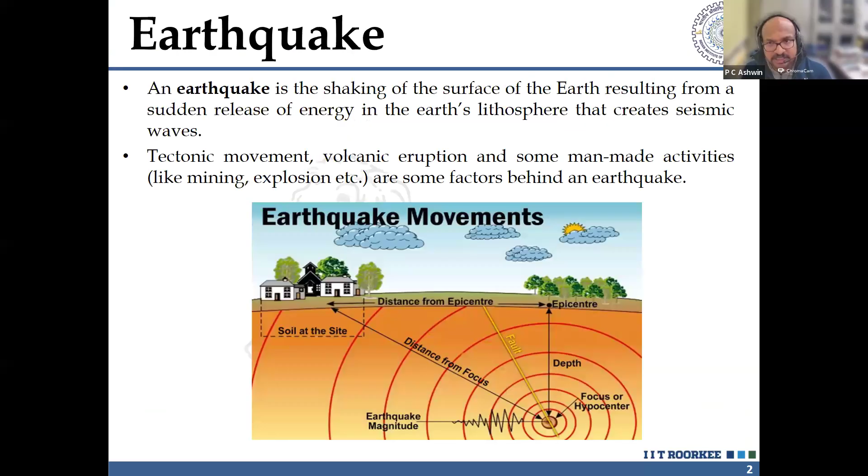So before the structure, this particular thing is related to earthquake. We understand that the earthquake can happen due to tectonic motion, volcanic eruption, or man-made activities. That is how an earthquake can occur.

Now, when an earthquake occurs, you have to understand that it is due to ground motion vibration, and it can impart on the structure acceleration, velocity, and displacement etc. Due to different intensities or magnitudes of earthquake, the damage that is there in the building can be varying.

Now, when you ask me about earthquakes, civil students or civil faculty might be able to understand that yes, during an earthquake, we expect damage to happen in the structure because we are taking care of the forces through the use of response reduction factor.

What we do is, if an earthquake is going to come and there is a demand, let's say 1000 kilonewton demand, think of it as a force. We actually divide that force by a certain number, based on the ductility of the system. The more ductile the system, the higher value of response reduction factor we use.

So we expect that when the earthquake happens, the entire structure is not going to be elastic. It is going to deform, going into the inelastic range. And because of that inelasticity, there is bound to be some cracks that happen, let's say hinges in the columns, cracks in the walls, etc.

The main intention of earthquake design, the philosophy with which IS 1893 and the different codes are made, is that if there is a severe earthquake, the structure will not collapse and your life is safe. So that is the case that we expect damage to happen in the buildings, right?

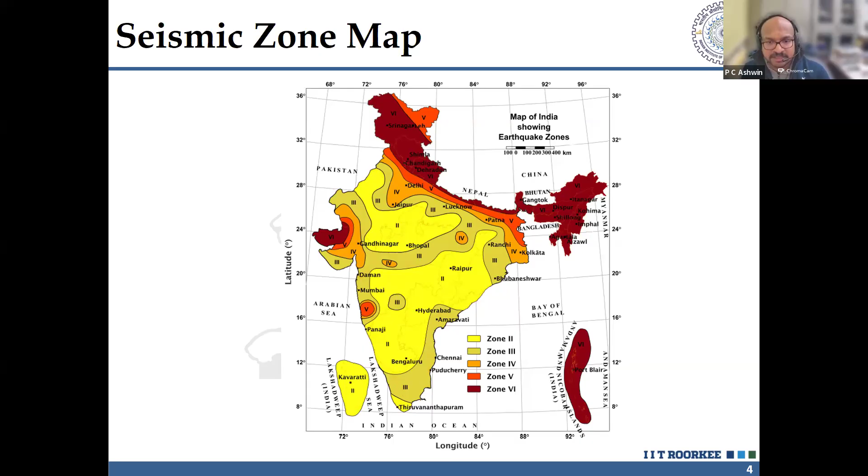These are the highest seismic zones in India, and you can see one more thing, that there is no place immune to earthquake in India. Somewhere or the other, an earthquake can happen in these regions. So this is the latest seismic zoning map, based upon the probabilistic seismic hazard analysis. There's nothing better than this in terms of understanding the seismic zoning.

Now, if you want to understand how the building responds in terms of an earthquake, simply like how a teacher would explain: earthquake is something like forces in the ground, the ground motion is happening. So why do buildings attract these forces? It is because of the inertia, the mass of the building.

If you're standing in a bus and the bus moves forward, you are pushed backward because of inertia. Same way, if the ground motion is from left to right, your building sways from right to left. That will create some kind of stresses, like any material, if I bend it, there will be some stresses developed. If the stresses are within the elastic limit, the building will come back to its original position.

If it is more than that, it will go into the nonlinearity. So how is the force transferred?

The slab, where your furniture, tiles, live load, and your load itself is there, is a main contributor of inertia in a building. Your walls, columns, and everything resist these forces. So how does the force flow? From the slab to the wall to the footing, or from the slab to the beam, beam to the column, and column to the foundation. That is how the force transfer happens.

Now you need to understand that the building can move in any way. If an earthquake comes, it's not that it will come from left to right, top to bottom only. It can come in an angular fashion also with respect to the building. But you have to understand that, as in nature, everything has a natural frequency. The building also has a set of frequencies which you can call natural frequencies.

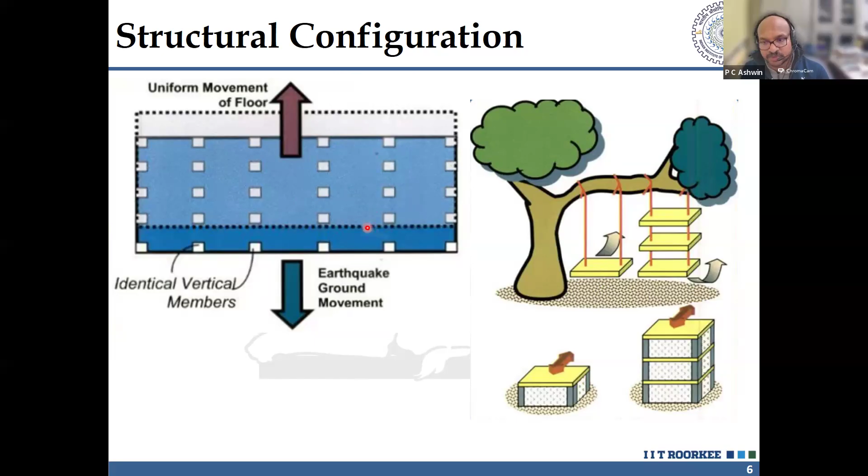Now, when we expect a translatory motion, if such mass is heavy on one side, the overall structural behavior will show a kind of twisting movement, inducing torsion in it. Torsion is not preferable in a building.

So what does the code say? There are design codes available in India which say that once you design the building, make sure your first two modes, the first two frequencies, relate to translatory motion, and the torsional mode should be shifted towards the back. This means if an earthquake comes, the primary mode will be translatory and torsion should be avoided.

But if you cannot do away with your building design - let's say you're placing your water tank towards the right side, a corner of the building where the toilets might be - then you have to add some stiffer element. Let's say it is twisting like this; what you have to do is stiffen this particular area.

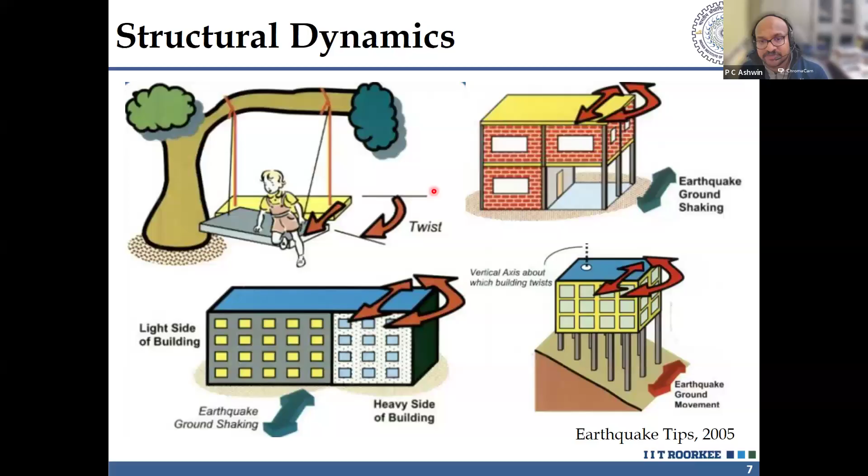The key plan here is to ensure that your center of gravity of the mass and the center of stiffness, with respect to all the elements like walls, columns, etc., are lying at one single point. If both of them coincide - center of mass and center of stiffness - there will not be any kind of torsion. So we have to take care of such action in the building behavior.

Now, if you follow that particular nature of how the building should behave, if you follow the code etc., we believe that in India we will not face any kind of failures. But as I said before, for a building, if you are doing IoT or AI kind of study, there are many avenues where you can work on it.

One application is post-earthquake reconnaissance. Let's say an earthquake happens in a particular area, the building may behave in a certain way. Maybe the first mode is torsion, maybe it's translatory. Cracks occur in the building, and there may be plastic hinging, meaning non-linearity has completely come into a beam or column. It is necessary for you to understand how to identify what has happened.

So the case is, let's say I visit a site after an earthquake, or go to a building after an earthquake and see certain cracks are there. How do you identify what has happened to the building? This is very crucial to understand.

So even regular, code-defined buildings are usually controlled by what the architect and user want. You yourself might say, I need car parking on the bottom floor, I need floors above. So you are inducing some irregularities in the building. I call it irregular because you are manipulating the code to get a beneficial effect for functionality, but it violates the codal requirements we've discussed, and the ideal behavior we want may be violated.

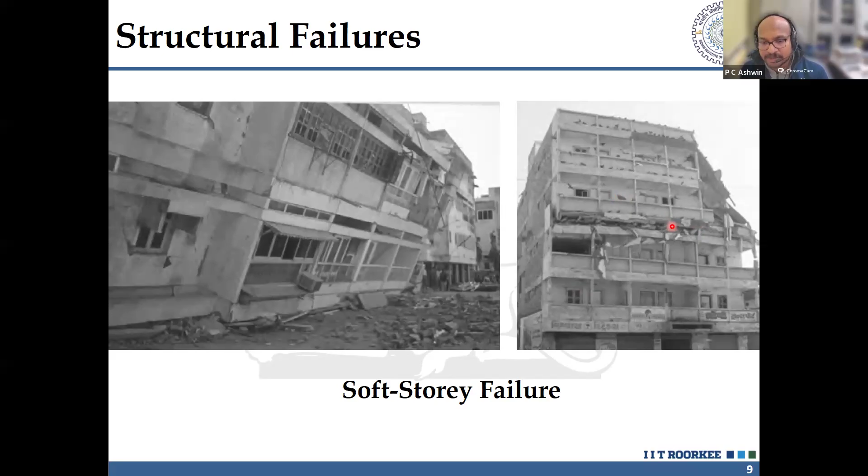This is another type of failure similar to soft story failure, where one part of the building actually collapsed, since it has parking on the bottom floor.

What are the other failures? There can also be floating columns. You have to look at the structural diagram of the building to identify this first. Whether you're placing a sensor or flying a drone, the first thing to understand is the structural configuration of the building. There may be a column that starts from the top but does not continue to the bottom to transfer the forces. Then there's a problem, because at that level a higher concentration of forces may develop, which can cause failure there.

Else, if your column was beginning from the bottom and stopping higher up, that is fine, because you have continuity down to the foundation.

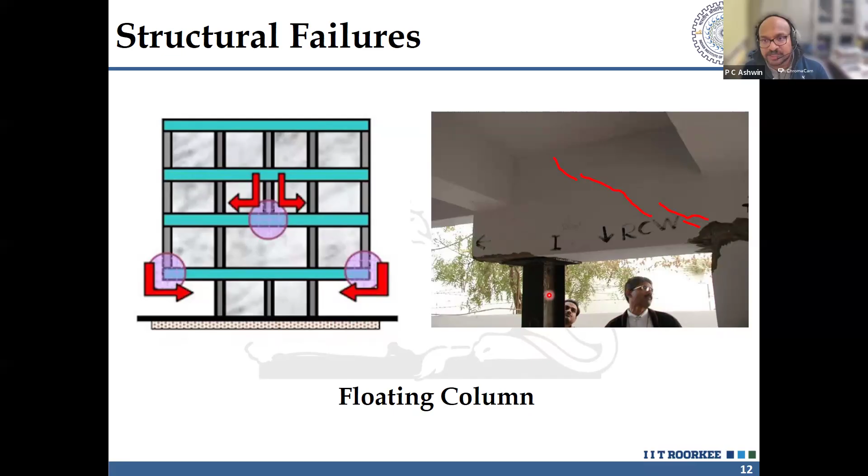These are examples where such kind of things was looked at. This is a simple example - if I have a plot of this size only, what I will do as a tenant or building owner is try to increase my floor area on the upper floors, causing a cantilever here. This is a discontinuity - I'm not continuing the column to the bottom. That has caused a shear failure in these beams at this location. After the earthquake, people have kept temporary columns at the end to give support to this location so the building does not collapse after an earthquake.

So you have to understand what the vulnerabilities are, and for such buildings, you have to place sensors accordingly.

Next is pounding of buildings, where two buildings are side by side with very little gap. That is how we build nowadays - each plot is side by side with no area between them. When an earthquake happens, more than the structure getting damaged due to any irregularity, it is damaged due to the pounding between the two nearby buildings.

If the slabs are on the same level - let's say the slab on the left building and right building are at the same level - damage will be a little less, because a slab in its own plane is stiffer than out of plane. Whereas if the slab at one floor is different than the other, you have more forces hitting it. So in such a building, you have to understand how much drift or deformation it is going to undergo, and place your instrumentation accordingly.

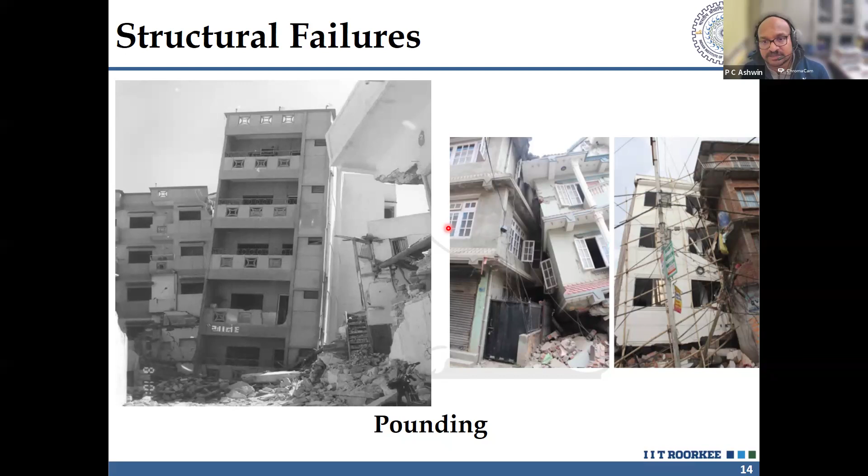Now, when we say earthquake, we normally ask what should you do if one happens. Normally what we do is run from the building - we say run away to an open place and stand there. But the most vulnerable kind of locations are the staircases.

They are vulnerable because when a design engineer designs these staircases, he does not consider staircase modeling in totality, like a diagonal element going from one floor to the other. To consider the loads going to the column, he applies a simple plain load on top of one particular floor. But think about it - the staircase slab is moving from two floors with a landing in the middle - where are the landing forces going and attaching at the middle of the column? If you don't design the columns properly and they fail, the staircase is going to come down.

So what is the best thing to do during an earthquake? It is not to run away from your building. The better thing is to hide below any kind of bench or table. That is the better way - if the building survives, you survive.

Then we have another problem. If you understand how the building is going to behave and these are the vulnerabilities and issues you have, the next vulnerability is that the reinforcement bars are corroding. People are not using the correct kind of reinforcement bar, or they are not using the right type of water, which should be drinkable water. There may be chlorides in the water, etc., which may cause corrosion to the rebar. What happens during corrosion is that the thickness of the rebar will go away.

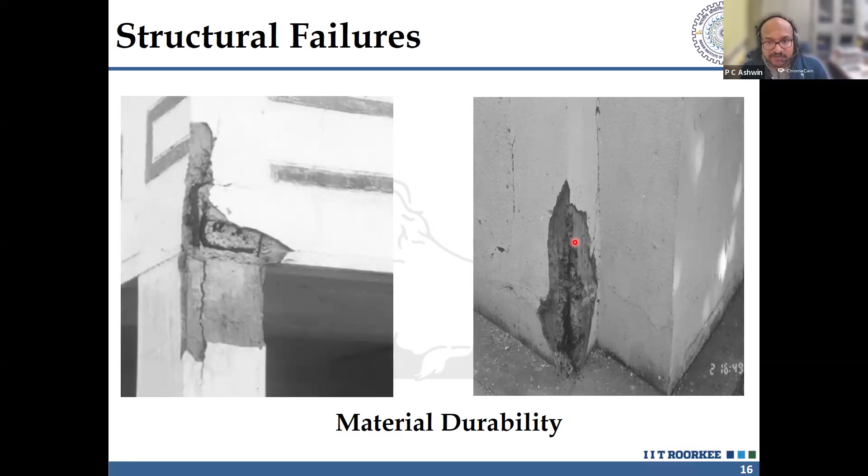So these issues you have to monitor, where is that deficiency. Normally in an area where water is there, where air is there, that is a place where corrosion can come. Else you have poor quality of material that is being used. Sometimes you don't find the right cover which needs to be provided.

So if you are thinking like, I can digitally monitor the condition of a structure, you have to understand where and why it is going to deteriorate. That you have to understand.

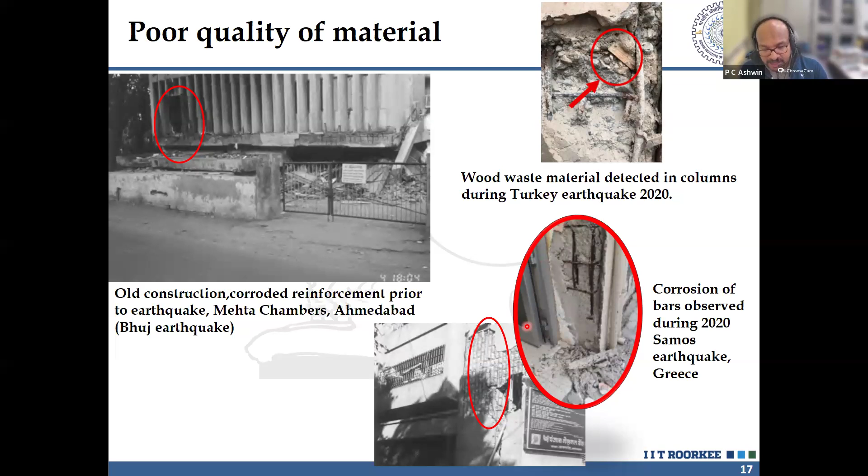Then let's say you have won the battle with respect to the code, you have understood how the building will behave, you have understood how the material can go wrong. You have one more person who's going to alter what you think about the building, that is a contractor, who is going to do such a thing that there is no shear reinforcement.

If you see a building with, let's say, a column, you will see when it is being built, you have vertical reinforcement as well as transverse reinforcement, something like this. The function of transverse reinforcement is to take care of the shear.

It is to give buckling resistance to the vertical rebar. Those are the functions that a shear reinforcement is there to do. And it is also there to give confinement to the concrete, because the horizontal stirrup increases that confinement, increasing the confinement strength of the concrete inside that particular cage. So it has three functions.

As I said, it is to resist shear strength, to give extra strength to the concrete within this, and the third one is to avoid buckling. Because as soon as an earthquake happens, there is going to be peeling off of the cover concrete.

And if there is no stirrup there, it is simply just simple bars standing. So there is a huge possibility that they will buckle under the compressive forces due to the self-weight of the building or due to the earthquake that is going to happen. So if such an arrangement is already there in your building and you are thinking that it will behave in an ideal manner, no, it will not.

So if you don't have the ideal mechanism, or the kind of sensors - I'm again and again saying sensors, but you can think of it as a means of identifying what will happen to this building. If you don't identify what is going to happen, it will give you a very wrong message that everything is okay. So every irregularity - building irregularity, torsional irregularity, heavy mass, bad material, bad workmanship or execution - can all lead to a different answer if you don't consider it properly.

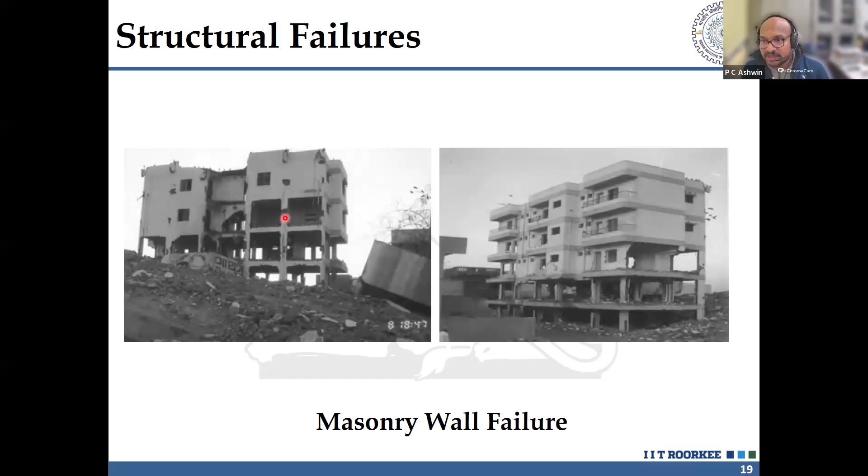What is next? You have different materials coming into picture. It is not just nowadays that you have RCC elements with concrete poured and kept. Trying to save time, people are using these precast panels. They say quality is maintained, since you are doing it in a fabrication yard or casting yard. You're making it so quality is good, and it saves time by just bringing it to site and placing it. But during an earthquake, such kind of precast panels are a strict no in a high seismic region. Precast systems are not allowed because they don't have an integral behavior. So the system itself, the way you try to bring it together, can have a different problem.

Now again, your plot size, let's say it has a corner, like your building is L-shaped, or has a plan irregularity. From top, if you see, this is an L-shaped building. What happens? This arm moves left to right, let's say this arm moves front to back. What will that cause? It will cause high stress concentration at the corner of the building.

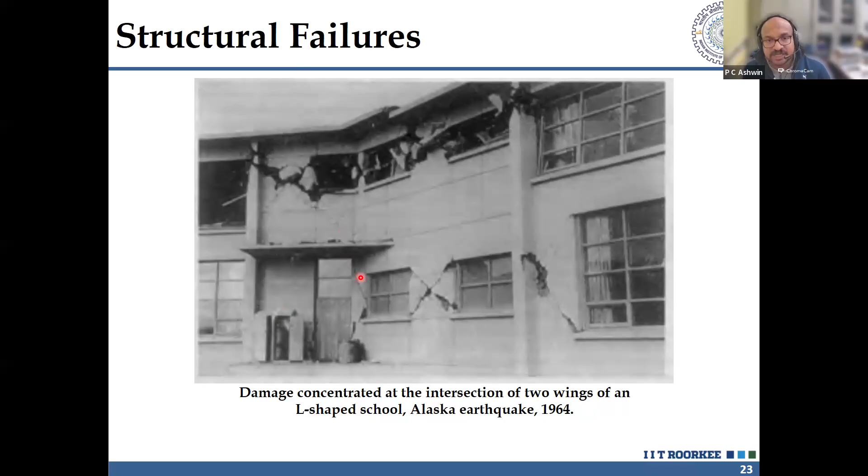These are the issues that if you go to a building, let's say to put a sensor or anything like that, you have to understand that at these corners is where the stresses are going to concentrate. That is where the damage is going to happen maximum, and that may lead to the failure of the building. This is an old 1964 image from the Alaska earthquake, showing that at the corners you have major damage, while the rest of the building has no damage. So such concentration happens due to these re-entrant corners or something like this.

So these are the plan irregularities. Nowadays architects are being more ambitious, making too many irregular buildings just to make them look nice, but that has an implication on the overall behavior of the structure. You might say, why don't we put a leash on their thought process, why can't we make it uniform like this? So the code actually gives direction on how to plan the building, how to ensure that torsion doesn't come. These are all checks already given in the code: torsion irregularity check, then re-entrant corner checks, how much projection, how much L is good, how much projection in one direction is good - the code already gives you this.

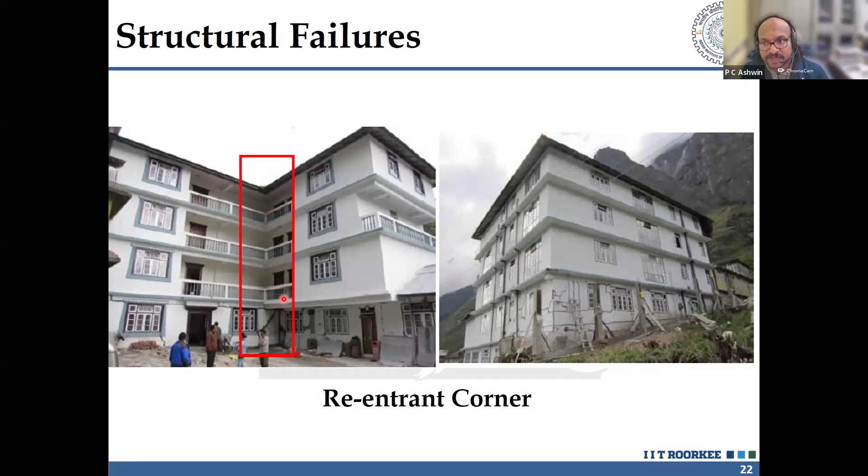So if it is a code-abiding building, its behavior will be different. If it is not code-abiding, you may find such kind of failures as you saw earlier - at the corners you can see the damage, there is a crack, a whole crack here. After the earthquake, when the authorities come, the first question is: can we reoccupy it? Second question: how much will be the cost of repairing this? So if you've already made the building vulnerable, then the cost is going to increase more.

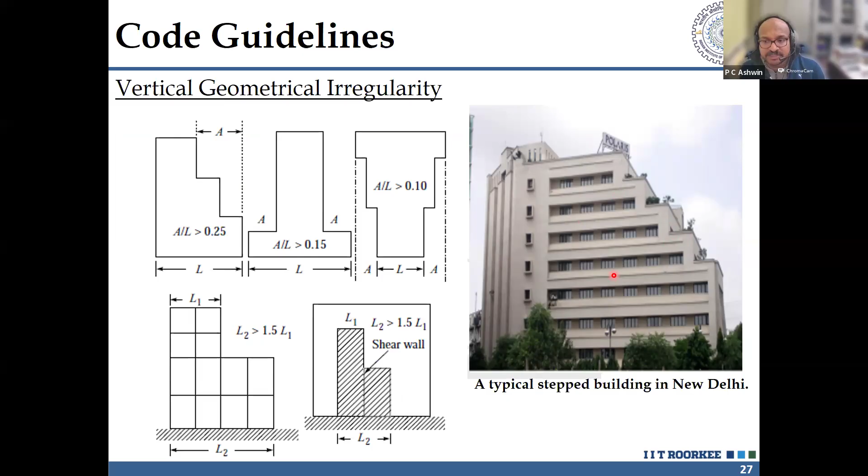Next, there's explanation already given with respect to the code as to when a penthouse at the top will lead to a mass irregularity. The code already says that if the mass on one particular floor is more than 150% of the floor below, then it will lead to a problem for your building. So there are already directions given by the code for this. Let's say vertical geometrical irregularity - these kind of buildings are there in New Delhi, in Chennai, in different places. Such structures already have a defined behavior - when an earthquake has come and attacked them, they have shown a certain kind of behavior problem. So based on that, these issues have already been observed in such kind of buildings.

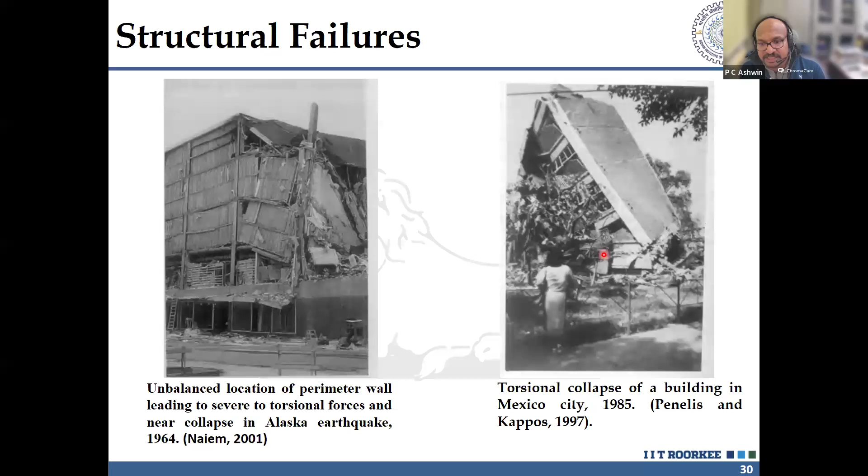Again, torsional irregularity is there. You can see center of stiffness as well as CG of the building are at different locations, leading to torsional irregularity. So the code says how to check them and how to avoid the problem. If you don't do that, these are the kind of failures that you see, which is the Alaska earthquake 1964, and then Mexico City 1985. These are all buildings which were affected by torsion, etc.

Then you have openings, like in malls and all. When you go to a mall, there is a huge opening given to have an atrium opening, something like that. That leads to the diaphragm, the whole floor panel, becoming very flexible, which means if the floor panel is very flexible, it will throw more forces to columns or a certain part of the floor rather than moving it uniformly in one direction. So these are all the issues that can come.

So the takeaway from this is that in a good seismic resistant structure, you need selection of the load resisting system, configuration system, basic dynamic characteristics you need to understand, and construction quality should be the best way in order to get the ideal behavior from it.

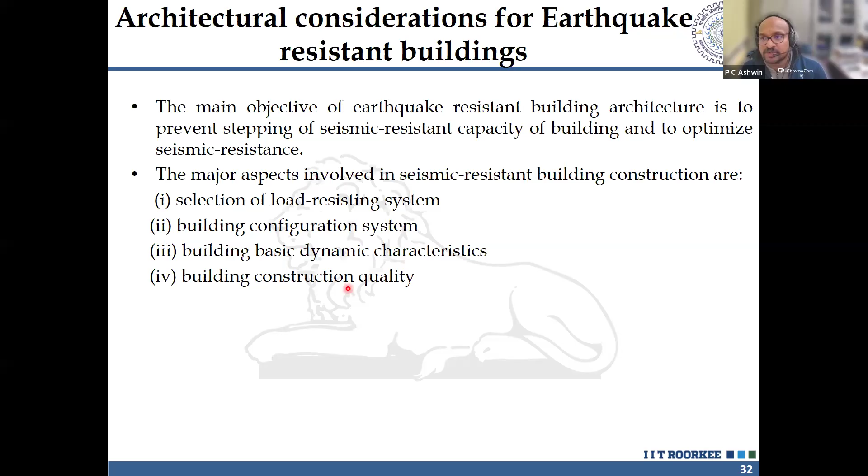But if you're into IoT and AI for a building or something like that, you have to understand the dynamics of the structure. You have to understand mode shapes - mode shape in the sense how it's going to move during an earthquake. What is the fundamental frequency? What is the natural frequency? Whether it is going to twist, whether it is going to translate, etc.

Then you have to understand the building frequency and ground period. Why I put both as similar is that just as a building has a natural frequency, or a pendulum has a natural frequency, the ground is also having a natural frequency. So what do you think happens if the ground natural period and the building natural period match? You're going to get resonance, so your building damage is going to increase more. So it is not enough to just look at the building.

There should be some understanding about what is the time period. So assessment of the time period of the soil below the structure is also important before you move on to the structure. That is a point I want to convey. So if you don't know about the soil, and suddenly you are saying something is failing, you don't even understand what the issue is, you will be in trouble interpreting what has happened.

Damping - if you increase damping in a structure by any means, what will happen? When it translates, it will come back to rest very quickly, if the damping is more. So higher the damping, the better the structural performance is going to be. Normally in a building, a normal RCC building or a steel building, this damping is around 2 to 5%, nothing more than that.

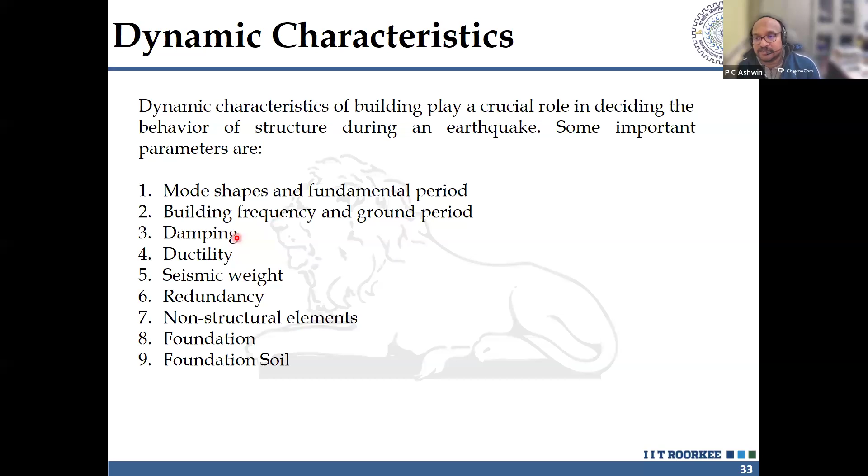So if you are thinking of making a digital twin, or doing a post-earthquake reconnaissance, you have to necessarily understand everything that is written here in order to finally get the idea of what behavior you're going to get.

So when you use strong column weak beam criteria—you must have heard about this criteria coming into the picture—that criteria was not meant for the fact that, as a structural engineer for earthquake domain, you make the beam weaker than the column so that the beam fails and you have enough time to escape, but if the column fails the entire structure may fall off. You have to understand the actual reason strong column weak beam criteria came into the code is to have adequate plastic hinges forming in the beam, such that you can dissipate the energy coming from the earthquake. That is the main reason.

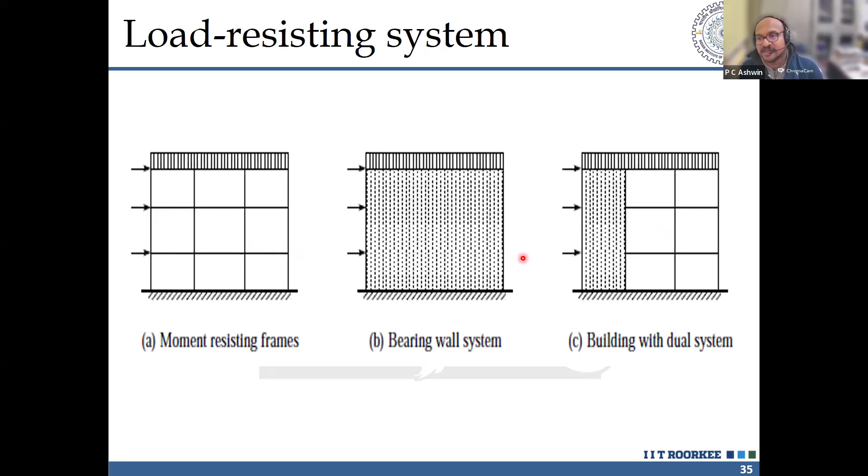Then people use dual systems also. You may mostly encounter structural systems like these in your area, where the core wall or staircases are mostly shear wall, and you have an RC moment frame going alongside it. The behavior of this is totally different from the other two systems. So you have to understand the structural system and then proceed accordingly.

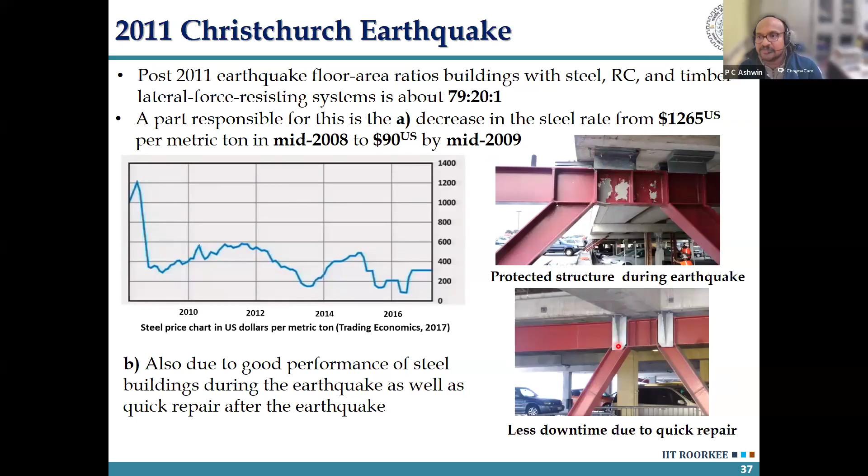The earthquake event happens, there is a dip in that activity, the economy has suddenly fallen, the social activity has gone down, and resilience is about how quickly you can get back to the original phase. For them it is about 7 to 8 years to get back to where they were originally with respect to building construction, etc.

Think of our country in terms of very congested areas in your locality. If such an earthquake happens, we already know that the buildings are not designed appropriately, because for a low rise 3 story building where we make our own home, we don't have a designer, we don't get it approved by a structural engineer or anything like that.

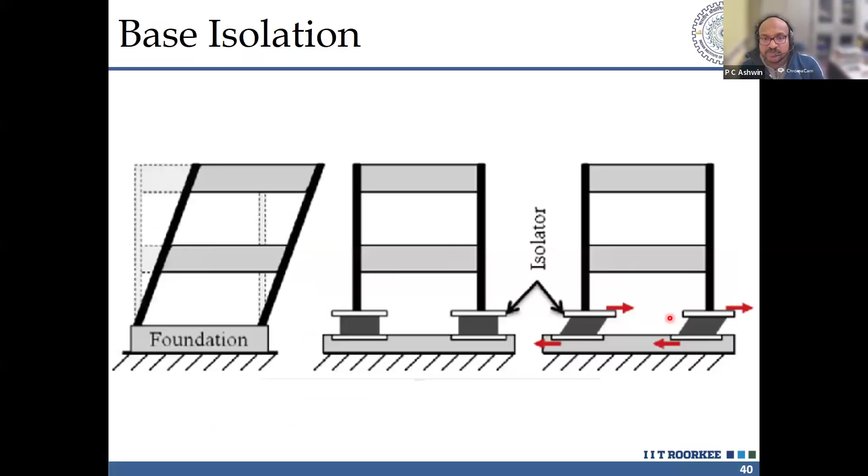Mostly what happens is when you use these fuse systems, whom are you protecting? Like which electrical appliances are you protecting in terms of your beams and columns? You want them to be safeguarded. You don't want your businesses to go down. You want resilience in your structure. You want maximum damage to concentrate in these elements so that your beams and columns are safeguarded. That is the whole sense of what is being done here.

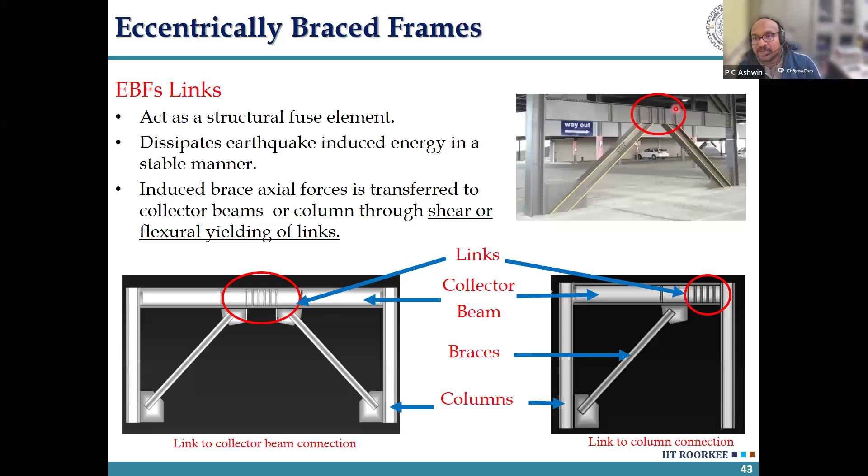So here the link is the guy who is going to yield in shear, let's say. This is a short link. So it is going to yield in shear, deform in shear, and diagonally buckle in shear to use all its energy dissipation capacity. So your sensors mostly should be covered around here. If you have a limitation of sensors, let's say I have one sensor, where to put it? My choice would be this location to understand where it is.

You have to understand the behavior. Then there is BRBF. You have seen this image where this is a brace, you have seen this EBF, now you understand this link element in the middle. But BRBF looks exactly like CBF. Orientation configuration is different, but it is still concentric.

So what is the difference? If you have ever learned the buckling of a column in your BTech, whether you're a computer science student or at your college level, you must have read about the Euler buckling equation. It's when does a column buckle under compression, like pi squared EI by L squared. But you have always used n squared pi squared. There is an n squared that is coming here.

That n squared is like if it goes into multiple modes of buckling, higher modes of buckling, that n becomes, let's say, first mode is what we normally say. That is the easiest way it can fail, since normally any member or structure would use the lowest potential energy to carry the load. But what if I stop that and allow it to buckle in the higher modes? So I provide a casing around this. So internally there is a core, and externally there is a concrete element or something like a restrainer there.

When the axial force happens, axial loads act only in the internal core area and apply forces there, and this external restrainer restrains and pushes it into a higher mode. So what happens in terms of CBF, where you had zero, almost negligible contribution in the compression area? Look at the same CBF when restrained and pushed into higher modes of buckling, you have almost equal contribution from the brace on the compression side also. So this is a much better system compared to CBF.

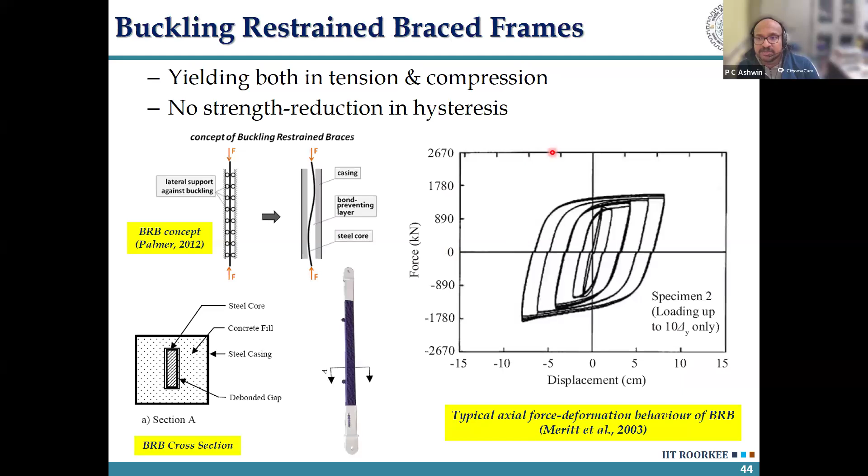In the US, Japan, and elsewhere, BRBF is very popular for giving seismic resilience to structures. India is picking up, and codal compliance and everything is going to come up. So what is the issue?

If you see a particular building, an RCC building in India, mostly buildings will be RCC. And if you see steel braces, the question will be, can I attach steel braces to an RCC? Will it work? Am I seeing an architectural element or a structural element? You have to understand that even if you provide this for seismic resilience, you have to attach it ideally, most efficiently, to the RCC element. Let's say I don't attach it, I just keep it like this - what is the use of it? It will not transfer any forces or yield or do anything because it will fall off as soon as the earthquake comes. So the first point is how to attach it.

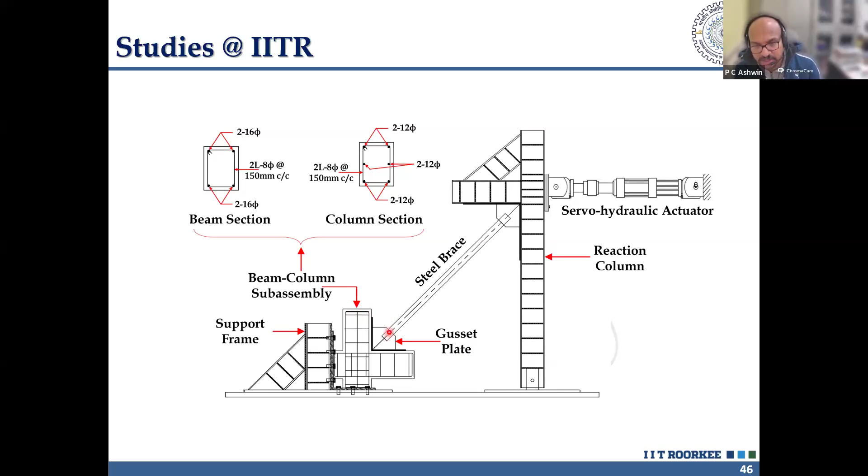So what we did in Roorkee is address what current Indian code doesn't speak to. Even American code, with respect to a beam column joint in RCC with a brace - whether it is BRB or CBF, it doesn't matter - you have a gusset plate through which it transfers forces to these joints. So the ideal point is how to ensure they get properly attached, and that is through anchors.

You can see chemical anchors, whether your building is already built or still in the construction process. If you look at your building after this lecture and say, yeah, I have parking in the bottom floor, so maybe my structure is vulnerable to soft story failure - you don't have to worry, because there are devices and equipment that can attach a steel brace to your existing RC column. That is chemical anchors. You have to drill a hole in your RCC, pour chemicals inside it, then put in a bolt, and you can test how much force it can take. This particular study was done to understand how much force it can take with reinforcement, following the detail we normally follow in structural practice.

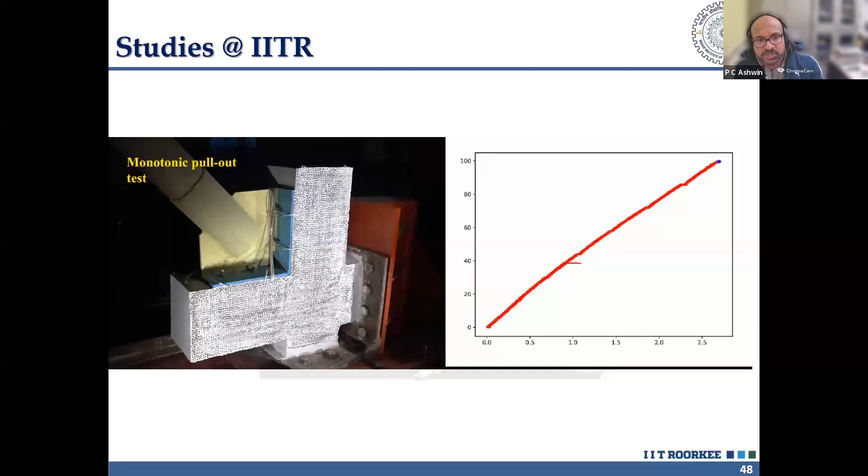So you can see how it behaves - I'll play this video for you. If you can see, this is being pulled. You must understand the behavior is totally brittle. The force is increasing, force is increasing, no physical damage is visible, and suddenly see what happens. I'll play it again - the damage happens at the very end, like a brittle failure, as to what this connection undergoes.

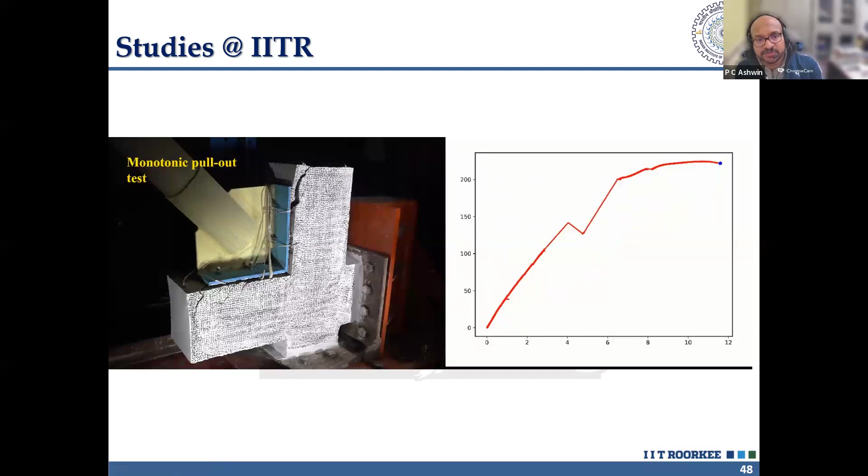Initially nothing happens, and then suddenly it pulls off. So you have anchors getting pulled off from the concrete, chemical anchor. So how do you check the behavior? We did different tests - you have diagonal cracks, edge failure, all these kinds of failures bound to happen in a structure. So what we did is compare a 12mm anchor versus a 16mm anchor - the failure pattern is the same, but the anchor may fail if you use a lower diameter anchor rod.

So one part of it was IoT and AI. The other part is to increase resilience. With respect to increasing resilience, yes, you have different devices like CBF, EBF, BRBF, all those things we discussed. But all of them are useless unless you attach them adequately to your RCC or steel structures. In steel it's easy, you can weld it, bolt it, etc. But if you're attaching it to an RCC member, the issue is how you will attach it to an existing one.

In a new building, when you are binding the reinforcement bar, you may give slots or other devices inside and then cast it. But if you're working on something already built without the code in place, the resilience can be increased by using devices like chemical anchors, etc. That's the point I want to convey.

So next, you may ask: you've shown this in small scales, will it work in the actual structure? What we did in the earthquake engineering department is cast a 5.1 meter frame. The height is 5.1 meter, the width is 4.5 meter. You have a plinth beam, masonry wall, slab on top, mimicking a real size frame. The column beam size is 230 by 350 mm. The column section, foundation beam, plinth beam, etc. are sizes representative of what a normal low-rise 3 to 4 story structure would have.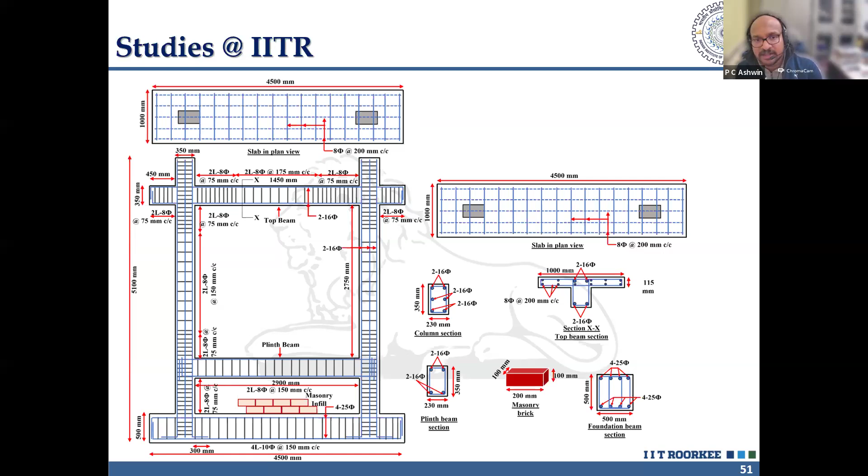Then we cast the whole system. This is the facility at the earthquake engineering department, and we applied axial load to it. In a normal floor, you have axial loads coming into the columns. You have slab, columns, beams here, and plinth beam here. So what do you do?

In a normal case, you have to retrofit it or increase the resilience. First you drill holes, say by attaching CBF. You drill holes, then insert chemicals and anchors. These are bolts with chemicals that are available - you can connect with Hilti, Fischer, those kind of companies produce chemicals like this. Then you bring edge plates with holes already in them, insert these plates where the bolt locations are, and then tighten the bolt.

So what you have done is made a surface onto which you can attach the gusset plate. On the steel plate, you now bring in the gusset plate and weld it there. Now in the gusset plate, you attach the braces - you can weld, or put a slot and weld to it.

Now, if you have a V type configuration for your braces, say I want to retrofit using a V frame kind of thing, you work in the middle of the beam at the top - this location right here. So if I have a brace like this, moving in a chevron kind of way, inverted V, I have to drill holes in the middle to get it. So again the same process: drill hole, insert the chemical, insert the bolt, then keep the plate which already had bolt holes made according to these anchors. Then bolt it, then weld the gusset plate on top.

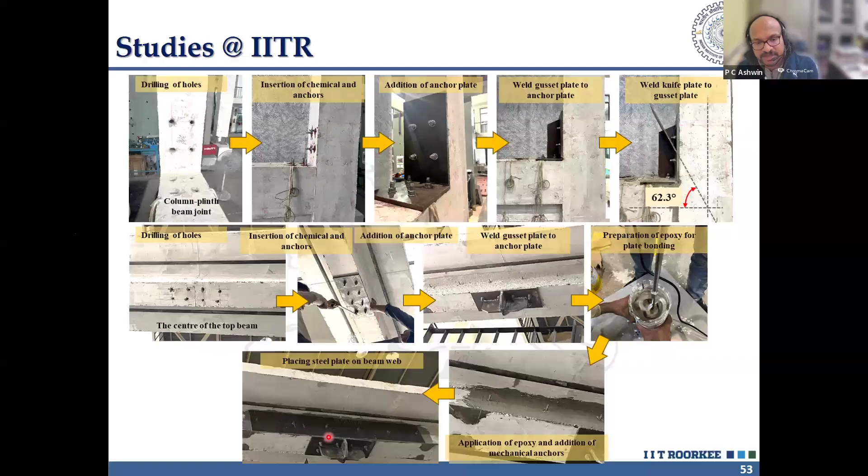And then epoxy plate bonding - I'll explain that to you. Additional plates were provided at the sides of the beams itself, I'll explain that in the next image. So you see this image, what I explained earlier - this is a frame which has been retrofitted, or to increase resilience, such a brace has been added. You can see the gusset plate, the brace, the gusset plate, and then additional plates here.

What you have to understand is that when you suddenly add a new element to increase the resilience of the structure, like adding a brace, you may induce additional forces to the existing beams and columns. If I have these braces here, this part of the beam may be subjected to higher shear forces. Say this brace buckles, you have tension in this brace, suddenly there is a vertical force that comes. This place was not initially designed for the higher shear force now coming due to this particular brace.

So to increase the shear capacity of these beams, some local retrofitting should also be done - only adding a brace is not enough. You have to understand we initially went with a design of a 4-story building, so initially there is no brace here, there is no plate here.

The shear is with respect to the demand coming from the vertical load, dead load, live load, etc. But when you add a brace to add resilience, suddenly you are saying that this brace will fail during the earthquake, so whatever it needs to have, let it have. It should not fail early. So what if the RCC beam fails due to shear, there is no use of the brace that is there. If the columns fail due to additional shear, the provision of brace being alive without any failure is of no use.

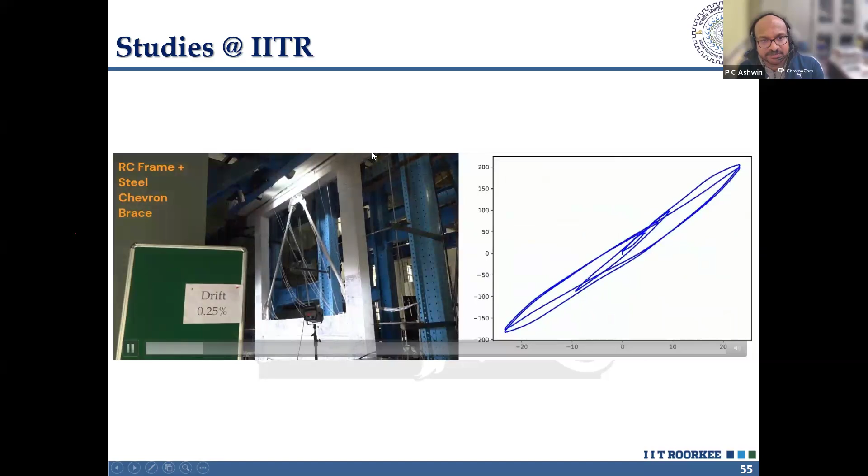You can look at the image of how the testing has been done. You can see these are the braces there, and this is the test that is done. It is doing cyclic loading, which means the frame is being moved left to right. You can see the braces dancing - the fuse, the hero of the element, is dancing now. At this deformation, it has started to yield because this area has started to elongate. It is buckling in one direction.

It's yielding in the other brace. And you can soon see the brace fracturing. Once the brace fractures, there is a sudden drop in the strength value.

So I'll play it again, but understand that this is an RCC frame retrofitted with steel. Earlier when I showed the beam, which was structural steel with a larger area - when you retrofit an RCC with steel, it is still an RCC kind of behavior there, so it is a mixed behavior that is going to come. But you can see when a brace yields, like here, it is elastic initially, then it is yielding.

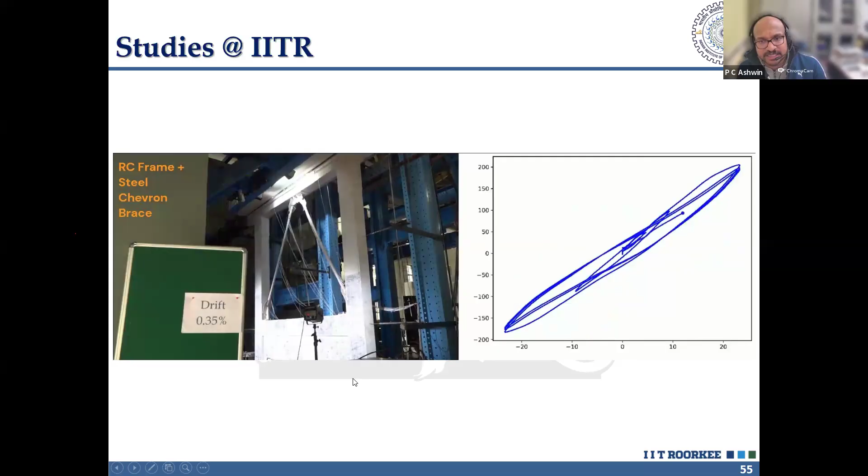And then if there is any sudden failure, there will be a drop in the capacity of the brace. So that is what is going to happen again. Once more, when it yields, it will be easier for you to understand when it yields. It has started to yield at around 0.5%, 0.75% drift. The area is going to increase because yielding is increasing furthermore. When it fails, there will be a sudden drop when the brace actually fractures, because then the RCC frame only comes into picture. Right now it has failed - the brace has failed.

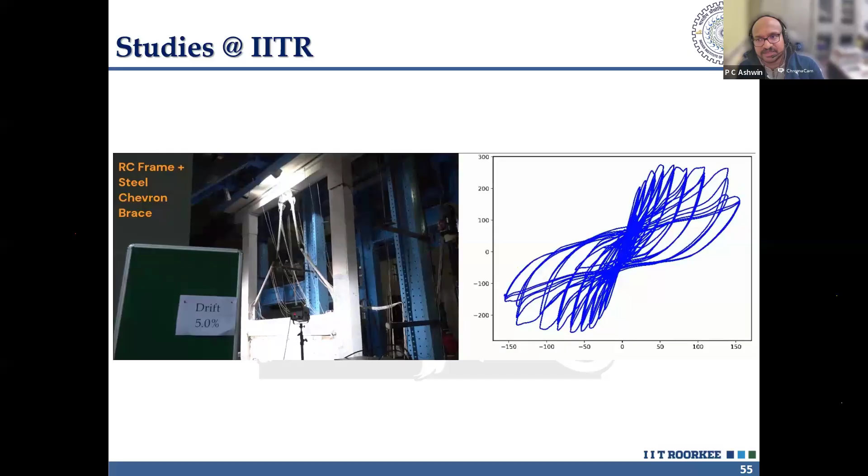So how does it look after the test with the braces? Is that okay? Can you see any damage in the columns? No cracks, nothing like that is clearly visible in this particular area. But you can see the plinth beam.

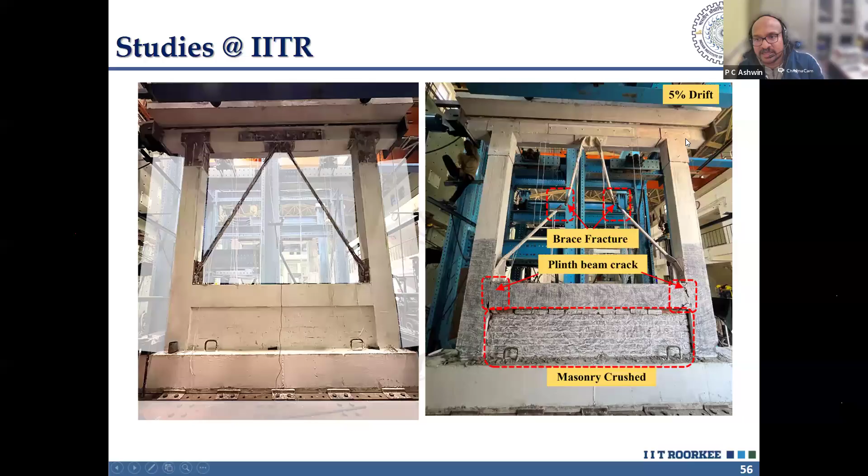Normally, as a designer, we don't design the plinth beam adequately. We think that it is only there to carry the wall load, etc. And because of that only, this damage is happening, seen in the plinth beam area. Then infill also, due to water ingress or rodents, etc. In India, we construct plinth beam there. So you have damage in this plinth beam area and major damage in the brace. But you cannot see any kind of cracks or anything in the beam or column area in the frame, and not even in the retrofitted area. So this is what resilience is all about.

Whereas if you look at the older buildings, you need to understand what are the vulnerabilities in them. Because nowadays, there is a procedure like you have to vet it from IIT, you have to vet it from NIT, you have to vet it from any academic institution for your building. You have to submit your designs in the municipality, etc. There is some catch. But yes, there are still low-rise household buildings which are made not with code, but simply as that. So if you are going into IoT, AI, or even structural designing, you have a menu of buildings - the ones which do not follow the code, which follow the code but are not new, some deficiencies still exist.

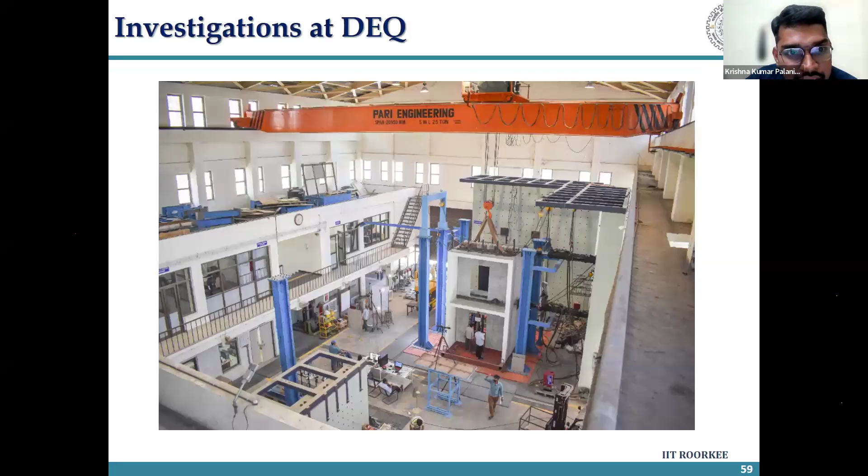Huh, two. So what if it is in the corner? It is much better. I mean, if you look at in the sense of understanding...

The question is first, where to place the braces, right? Yes. The thing is, you can place it in the interior core areas. You can provide at the periphery also. Interior, anywhere if you keep it, there will be a functionality problem as it will not be able to do that. But you can provide it in core areas also - around the lift where you provide a shear wall, at the exact location you can provide braces. They function in the same manner - they provide stiffness, transfer forces, etc. But you understand that if you provide it in the periphery, your torsional rigidity of the building increases. So if you have a building whose torsional rigidity is what is mattering to you, you will provide mostly in the periphery. Now the question is whether in the middle or in the corner.

If you remember the torsional rigidity concept, the farther the distance from the center, the better. So the corner becomes the most ideal location where you can give a brace frame. The only catch is that the corner column, if you provide a brace here, then you might be providing a brace here too, and this column will be very heavy - it will look a little heavy. That is the only thing. Otherwise, on the periphery towards the corner would be the most ideal locations to place the braces.

But sometimes, you see, there are steps. Sometimes a person might not want a brace here, that's why I'm accommodating it in the middle instead. The weight of the building also matters in this criteria.

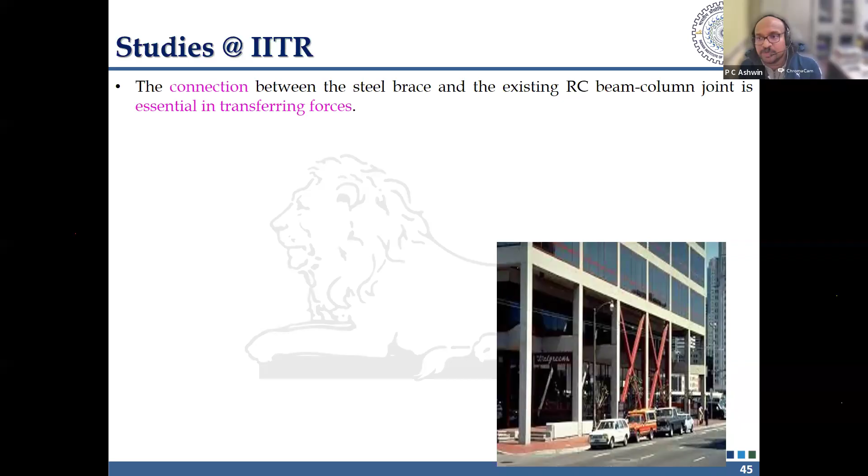Normally, if you have tension or shear, compression doesn't cause much of a problem. So normally, if you are pulling out in tension or shear, the anchors may fail. What you saw here is like an edge breakout failure - you have a pull-out failure here, and edge breakout failure here with the concrete. But if it was being pushed, compression does not induce much failure in terms of anchors. It is all tension and shear which is more critical than compression - and punching normally happens in compression.

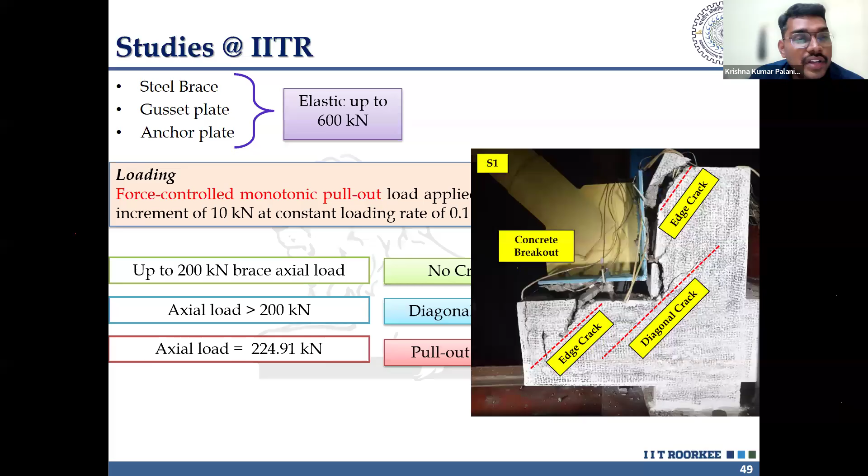One more question sir - you showed a drift of 5%, maximum drift of 5%. I have a curiosity to know at what magnitude of earthquake, or what level, we get a drift of 5%.

Normally what people do is numerical modeling of structural systems, and then subject it to DBE - design basis earthquake - as well as maximum considered earthquake levels. Design basis earthquake is when we design for an earthquake with a return period of once in 475 years. Then we have MCE level, the maximum considered earthquake - in an area like Roorkee, Chennai, or Bombay, there is always a maximum earthquake that can be expected at that location. So if I consider that earthquake, people have assessed the overall behavior of the structural system, RCC etc., and found that this overall behavior touches 5% or 4% kind of a level. So what people have understood is that if I ensure my structural system behaves well till 5%, then I have got a good system in my hand.

Because what happens in a brace frame system after 5% is that the brace may survive, but the connection pulls off or fails after 5%. The drift is very large - 5% drift is like a significant movement in the structure. You can say 150 mm, which is about 4.5%, is 150 mm of movement in the structure.

When the 150 mm movement happens, the beam column joint is like a very concentrated area. Your gusset plate might simply peel off or pull out from the concrete. Because of that issue, people have understood that if I have a system which can survive under MCE level, they saw that the requirement is 5%. Through ETABS model or OpenSees model, they saw that okay, 5% is the target. In that 5%, which system will survive is the question here. So moment frames, okay, it survives. Brace frame, yes, it survives. That kind of a way.

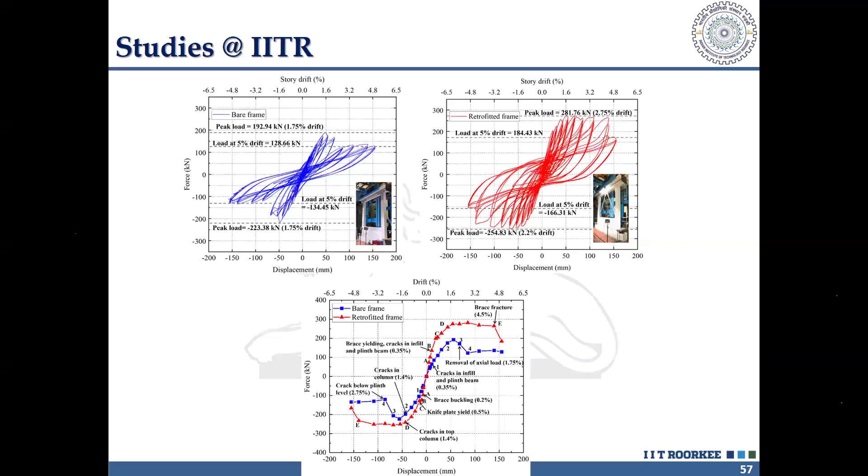If you have a huge number of interconnected buildings, we can avoid issues, meaning the efficiency will be increasing. So the question is, interconnected in the sense if they are cast together, monolithically cast, yes, it increases the redundancy. But the key question is: if I have, let's say, a 40-meter long building, would I be happy to construct it as a 40-meter long building, or would I reduce it to a 20-meter long building?

Like if I have 40-meter long, then the inertia is more, but redundancy is more. If I make it 20-meter, then the redundancy is less, but the mass is now reduced, the forces are less. So it all depends on how you want to do it. But an interconnected building is obviously better — if the geometry is same and everything, it increases the redundancy.

We have also seen a damper - a ball in the center of a building which oscillates, that is a tuned mass damper. Normally in tall buildings, to cater for wind etc., they keep these tuned mass dampers, like Taipei 101 uses. That is another damping device, which increases that inherent damping from 5 to a higher value, so that if it vibrates, it dampens out that vibration, so people don't feel acceleration or the sensation of being in a moving building.

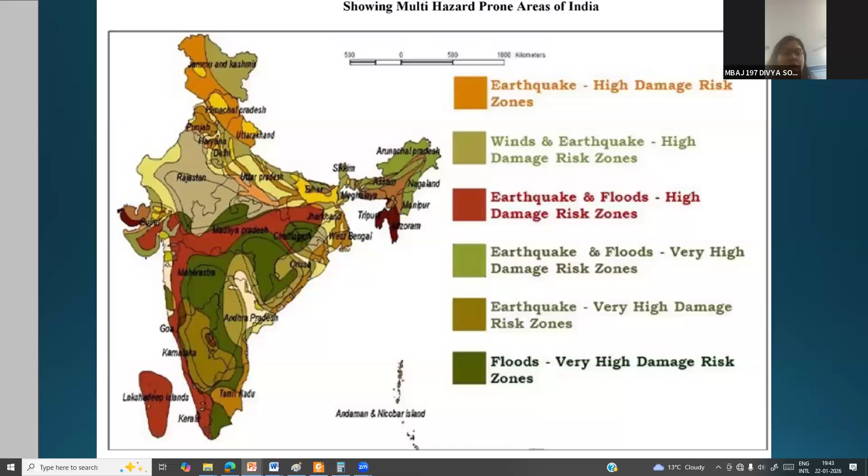Everything is interconnected. If an earthquake occurs near the seashore or sea areas, we can expect a tsunami. If an earthquake occurs in hilly regions like Uttarakhand, where I am staying, or Himachal regions, you can expect landslides. Earthquake is not the only cause for landslides - seepage issues and rain issues also cause landslides. And because of climatic conditions we are experiencing cyclones. So as per our manuals, we have wind issues, earthquakes, floods, and earthquake zones with high severity - these are different types of zones available.

Now, what are the critical infrastructures? Generally we have transportation - roads, bridges, railway networks, airports. You would have heard that during severe rainy seasons or cyclones in Chennai, our airports are actually closed. Why are the airports closed?

Number one, you can't allow aircraft to fly, take off or land during cyclones because of huge wind pressure - you can't perfectly land or take off. Number two, during landing and takeoff, the aircraft runway should be in proper order. Suppose there is water stagnation because of low lying areas, or some settlement happened - if you think everything is perfect but it's not, it would be a very big disaster.

So we have to be very careful. That's why during rainy season, if any cyclone occurs, we immediately stop all transportation - mainly roads, railways and airports, and even ships will be stopped. I have personally experienced this kind of thing during my lifetime, many times, two or three times. I have been at a railway station where the railway network vanished, and we were stranded for more than a day or two.

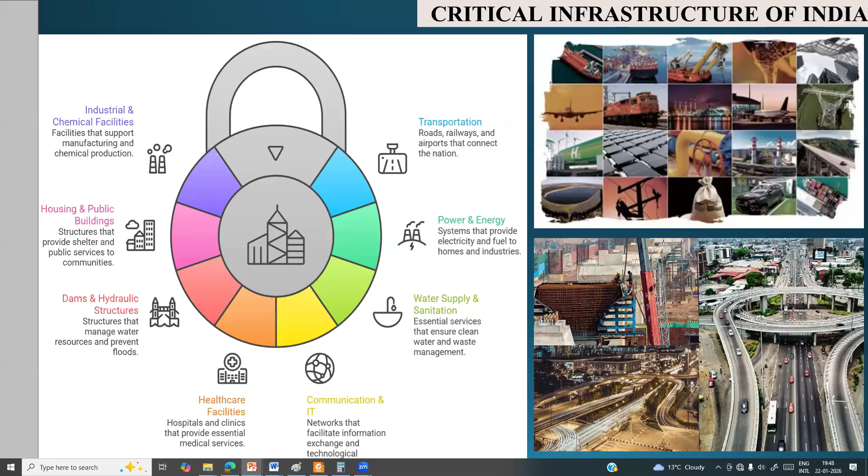Critical infrastructure failure - taking an example, because of the Chennai floods, people didn't have the option to use any other vehicles. We faced a lot of issues with insurance - we have a lot of insurance coverage, but not for flood-affected vehicles. When people faced that issue for the very first time, they were struggling to address it.

So we are not even thinking about insurance for many kinds of critical things. Infrastructure failure is like when you don't have options - for example, no access to roads, bridges, and railway networks. If it is flooded, how can we go out to bring the necessary materials and items?

Even for an emergency, you can't travel from one place to another. You have to wait until the water drains. Even if your aircraft is ready, you can't reach the airport, and you can't reach the railway station because of affected regions.

With critical infrastructure failures, we generally say that in India, road networks and rail networks are the real nerves of our country. If it fails at any point, just imagine a nerve - a particular area of your body getting affected or some kind of infection happening.

You can't even move freely - you will be completely under arrest. The same thing will happen to our country if it is not connected properly due to any kind of issue, be it any hazard.

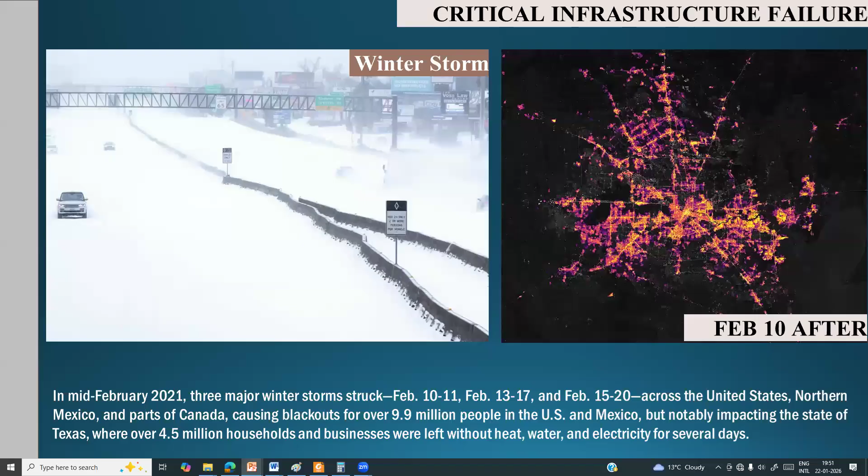So this clearly shows we are not discussing anything very innovative or critical, just common things. If winter occurs and snowfall severely occurs, we are going to lose electricity because in those countries they have underground drainage systems and underground concealed electric supplies, whereas in India majority of areas are open to the atmosphere. So in our case, it will be even more disastrous.

So earthquakes are common in Himalayan belts and Gujarat Kutch regions. Cyclones, as I mentioned earlier, heat waves and droughts. Nowadays we are facing these issues not only in Rajasthan regions but everywhere. Everywhere the temperature has increased. Everybody knows about global warming.

Landslides are not only in the Himalayas or Western Ghats. It's about wherever you have hills, and there are chances for landslides if you do over-construction on building slopes. If you have too much rain and your hill slopes don't have proper drainage, you can expect landslides. And then tsunamis.

As I mentioned, coastal belts are at risk. This is one of the effects of rapid urbanization. You can see people are just taking up construction, 3, 9, 13, 14, 18, and 2021.

People are migrating from villages towards the city, and when Chennai is flooded, it reaches Chengalpattu - that's from Chengalpattu to Chennai. Similarly, if you go to Bangalore, it's connected for those who know. If you go to Hyderabad, it's expanded north, east, west, south, everywhere. Why? Because people are migrating towards the city.

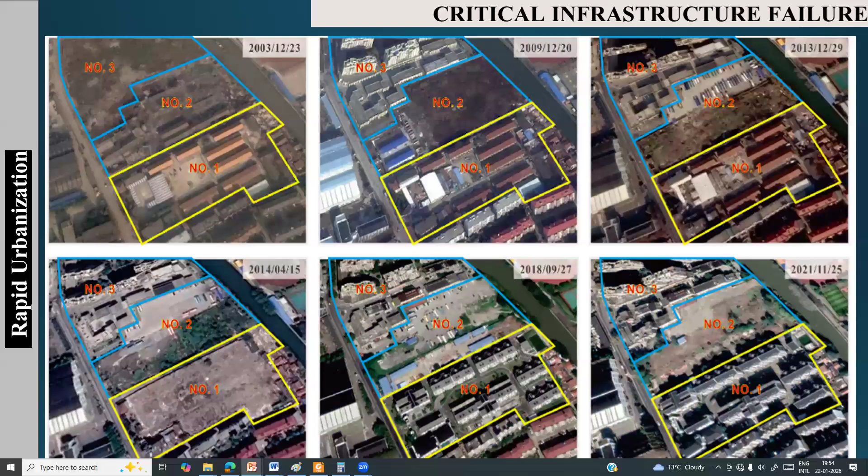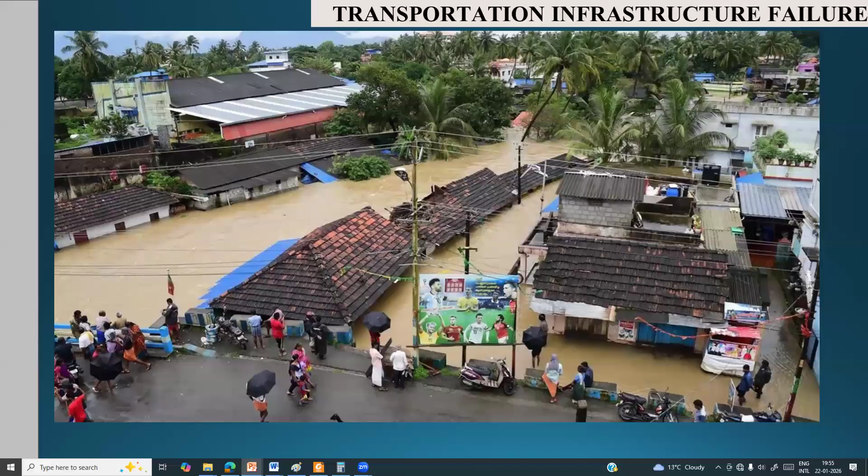So the road network is cut, and you can't travel from one place to another even for emergencies. Now the flood level is this much. We don't even know if further rain happens - even the flood level goes up, these areas will also be submerged. So what will happen if any kind of infrastructure gets affected?

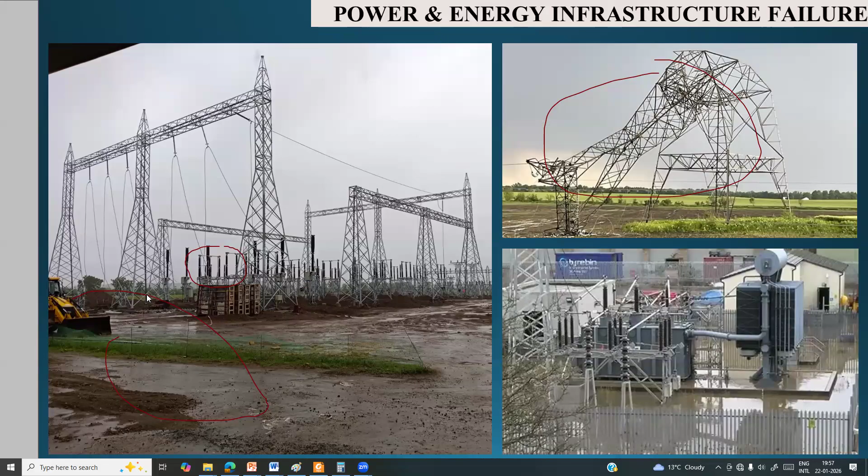Electricity issues, as I mentioned, occur during flooding and severe wind and cyclones. First, we used to cut the electricity so that people can be saved. But if your network is completely collapsed like this, you can't restore it immediately. So after a cyclone or flooding, the issues remain as issues, and we have to wait for complete restoration. It may take time—it's not a day's process, it's a huge process. We have to wait a lot more days.

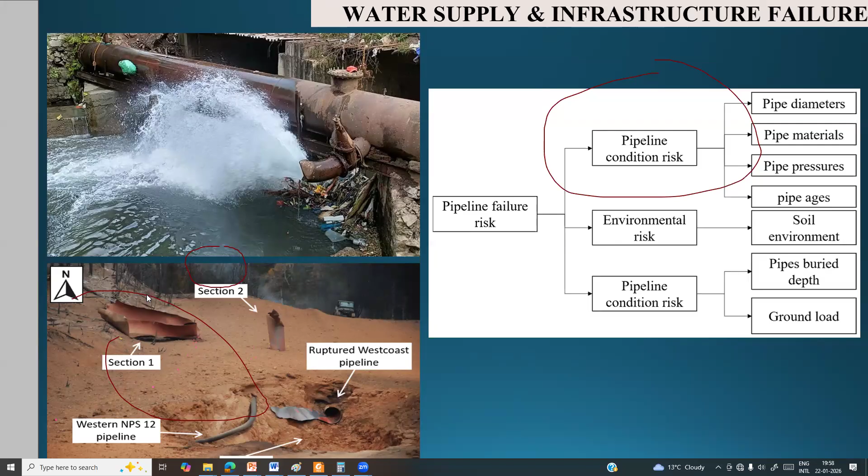Another thing is, now in India and many places, water pipelines are traveling over drainages and sewage lines, so pipeline outburst is also possible. Pipelines may merge with drainage waters. We are facing this kind of issue—that is called water supply issues.

Then housing and public buildings—it's not only public buildings, but if any building fails, we face a lot of issues. Mainly, if a hospital fails, all the people affected by this kind of hazard are going to suffer a lot. Number two, people generally, if affected by earthquakes or flood, tsunami, anything, will immediately be taken to nearby schools or open big buildings to accommodate them. In that case, if your big halls and school networks fail, the public building failed, we will be in trouble. So everything has to be kept under control.

Housing and public buildings have different criteria to understand the level of damage—whether it can be reused or used directly, repairing works are required, or it should be completely demolished. Again, it is with us only—you have to be very proper in construction as per our Indian standard. You can't follow any standard; in India you have to follow the Indian standard, so that at least we can safeguard our structure with minimal damage. That is more advisable.

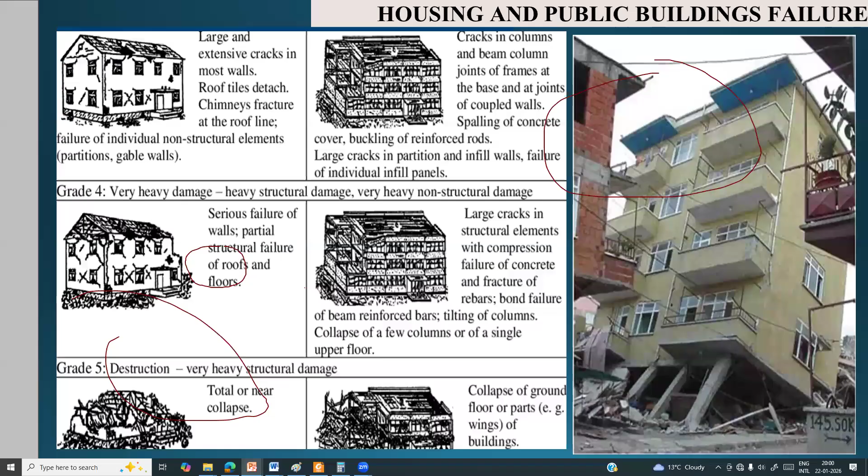So what is resilience? The ability of a system or society exposed to hazards to resist, absorb, accommodate, adapt, transform, and recover from the effects of a hazard in a timely and efficient manner, including through the preservation and restoration of its essential basic structure and function through risk management. If my building is completely collapsed, there is no point of resilience. If my building experiences minor damage that can be easily restored so I can immediately occupy the house, then my building is actually a resilient building.

That's what we want. We are not constructing all houses to resist earthquakes completely. Instead, we expect our buildings to survive with minimal damages, so that I can repair and even further improve the performance of my building. So what about the concept—just one clarification—if anybody has covered building resilience before?

Organizers, can somebody comment? Yes sir, Ashwin sir already covered some topics related to resilience. Okay, then I will skip all these things and go to some other point.

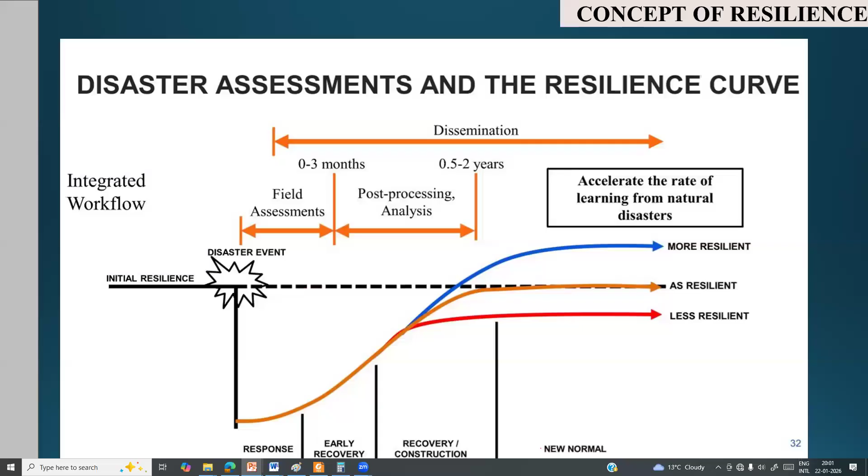Anybody covered vulnerability and risk assessment kind of thing? Sir, not fully, sir. They have covered vulnerability also, they have told. Okay, fine. So basically, you should know how to do the vulnerability assessment so that disaster mitigation

is nothing but, how do I mitigate myself from any kind of disaster, maybe earthquake, cyclone, or flood or anything. So for that, we have to do a lot of vulnerability assessment.

First we have to collect the data of the building. First, you should know the people who are living in your building. You people should have an awareness about the type of building you are in.

For example, in many places I have noticed people are constructing nowadays, migrating from masonry structure to RCC blindly. They don't even know why they are shifting from masonry to RCC. They think RCC is a safer building. No, it's not like that. You can even make your masonry building more safer than RCC, and masonry buildings are even more durable than RCC.

If you look at any normal residential construction, G or G+1, you can just go and randomly look at any construction. You'll see the foundation, the column size is going to be 230 by 230, and plinth beams are 230 by 450. As per our seismic design philosophy, strong column, weak beam. If any earthquake occurs, that building will collapse for sure.

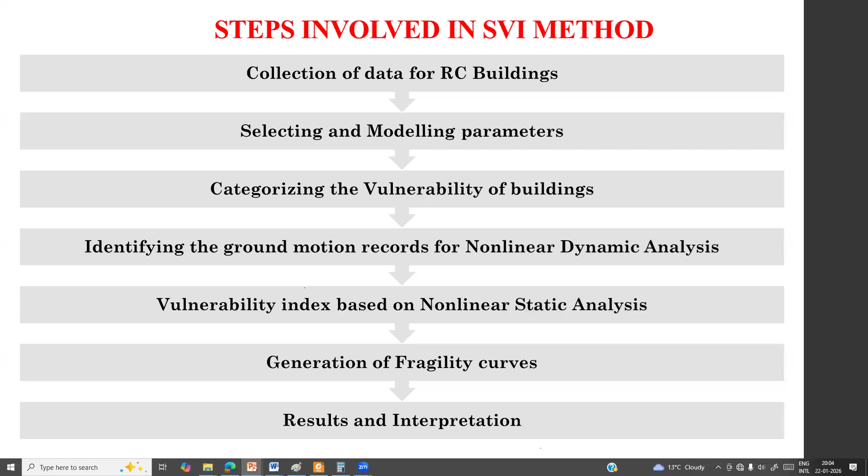So first, collection of data, and then we have to do a lot of modeling about the buildings, and do a detailed vulnerability assessment. These are the various types of methodology to understand about the things, so I'm just skipping over it.

This is rapid visual screening. It's very famous in India, and you can just go and see if you want to do any assessment. You can see the building, collect the data, type of buildings, and basic structural information like what kind of structural system it is. You can easily identify what kind of structural system it is.

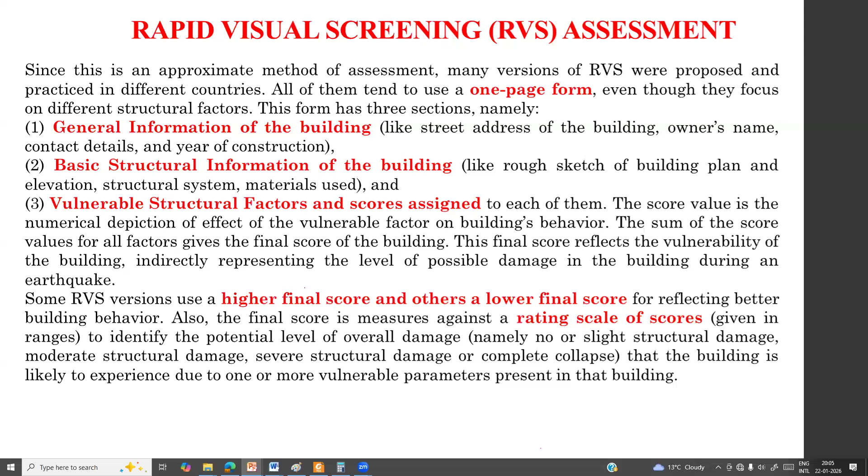Then based on the results, we can say whether this building needs retrofitting. It can be done pre-earthquake or post-earthquake, post-disaster or pre-disaster, it can be done very perfectly so that we can mitigate. Even if it occurs, we can go for retrofitting strategies.

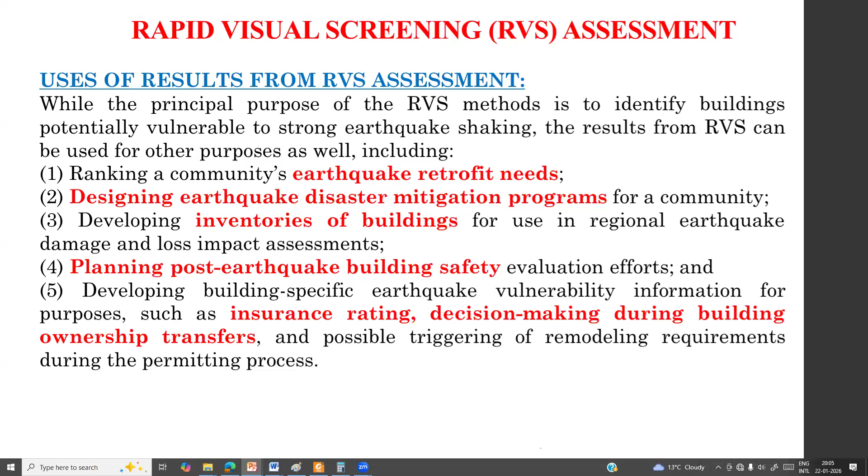These charts are typically available with our NDMA, so you can take this chart and go and collect the data, that you have done the collection of data.

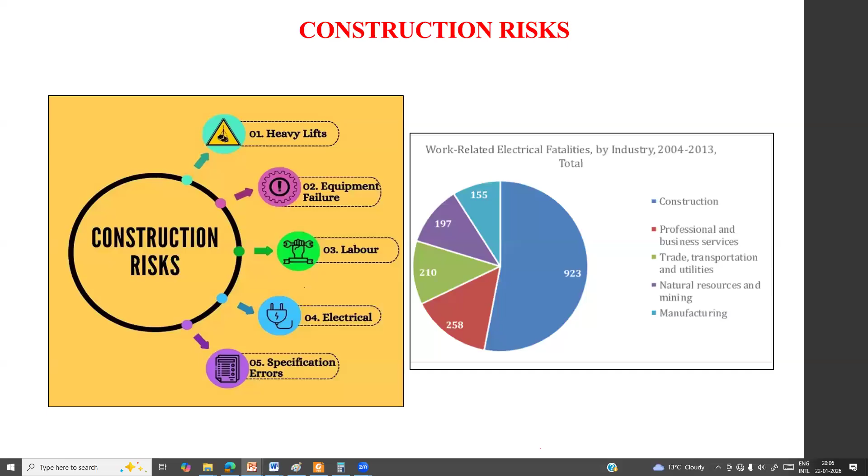So now, first of all, we have to assess risk identification, risk classification, risk analysis, risk response. So just a discussion about construction - I think it is also not required for you.

Recently people would have heard about Joshimath landslides, but that's not a landslide, it is actually subsidence. So what's the difference between these two? We have discussed landslides before, but this is land subsidence. Gradually over the years, Joshimath, being one of the peak areas in Himachal, in Uttarakhand, in the Himalayas, has experienced this.

If you want to go to Badrinath, you take the road from there. During winter, Badrinath and Mana will be closed - Mana is the last village in that particular boundary region. So people migrate towards Joshimath, which is the only place accessible. Still snowfall occurs in Joshimath, but it remains accessible. They have a chopper strip and everything available there, not an aircraft facility, but chopper strips. So that can be a connecting point for Badrinath and the surrounding regions.

In that region, huge buildings are constructed over a lot of slopes, and exactly below the slope there's a river flowing. If you just look up a small overview on YouTube or somewhere, you can understand how vulnerable it is.

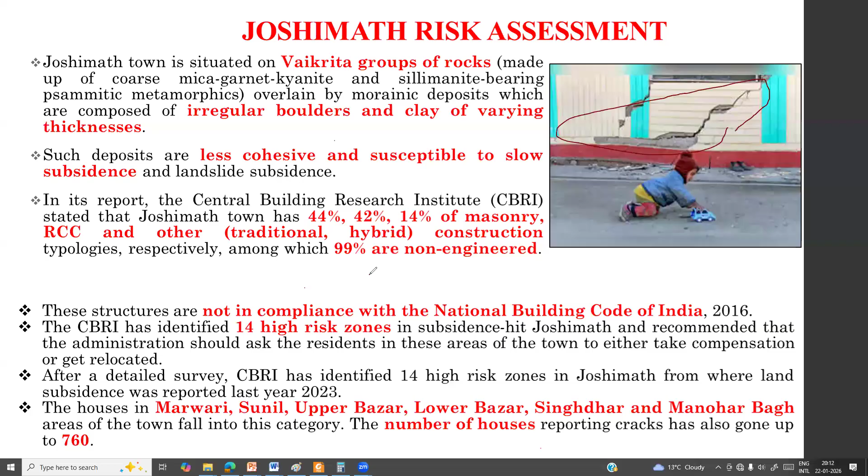The government of Uttarakhand has done a lot of study to understand what happened and how to address these issues. The main problem here is over-construction, mass construction in very restricted regions.

So if you ask me how can I prevent or mitigate the disaster, you can't do much mitigation here because the area is already overloaded. People have seen tensile cracks on the road, which clearly shows the area is getting subsided.

In that case, you have to do only one thing: proper drainage, so that no water can travel below the surface. It should travel above the surface. That's the approach we have to go for.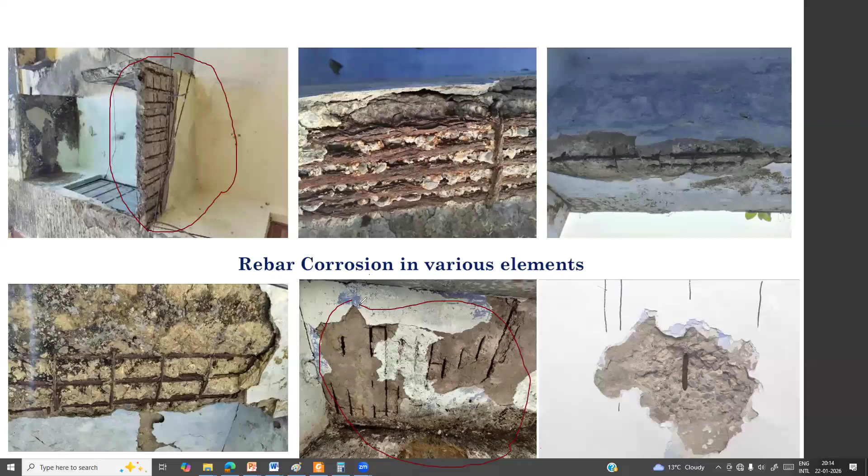Now we are not bothering about these things - we are letting vegetation grow on our buildings, not even worrying about it. Especially for public buildings, we don't bother, but public buildings are more important to safeguard for emergency purposes. In our case, we are not even bothering about public buildings.

Once everything happens, then we go for major repair works instead of regular upkeep. It has to be properly taken care of - we need proper repairing works, regular monitoring, regular maintenance. Otherwise you can't rectify these kinds of issues.

When you want to fight with any kind of hazard, you have to make sure your building is adequate enough to resist those forces. If your building is in a low-lying area, you should know how to lift the building and how to keep it protected.

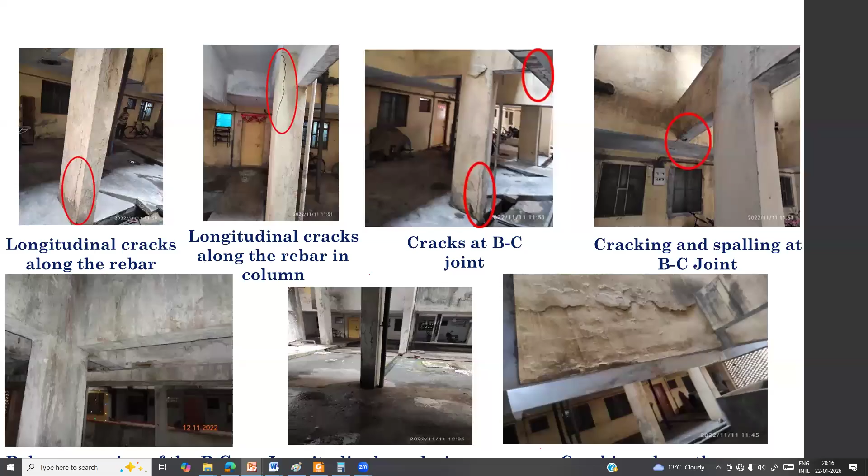These are typical observations we have seen in many buildings during our assessment. These buildings are already weak. Now, due to frequent flooding, the buildings are subjected to water rising up to a certain height multiple times a year. The water drains out, but dampness accumulates at this point, exposing the column reinforcement to polluted water, which corrodes the reinforcement.

So what is the need of disaster mitigation? I have clearly explained that we have to mitigate in advance so that we can avoid complete failure of any of our buildings, and we can safeguard our buildings.

Now in India, the NDMA has introduced the concept of PDNA, that is Post Disaster Needs Assessment. People should know about it. In this, the concept of reconstruction occurs, because earlier we got a disaster, and now we got affected.

Now what is the need of PDNA? It is like after complete collapse, like in Kerala, the sudden landslide you would have seen. How much devastating disaster happened. We lost many lives, many houses.

And then in Chennai and Pondicherry, huge flooding. I have personally visited those places. It's a huge disaster, huge damage to the buildings. And now coming to Telangana, there are also huge defects because of flooding. What I'm talking about is flooding, flooding, and flooding.

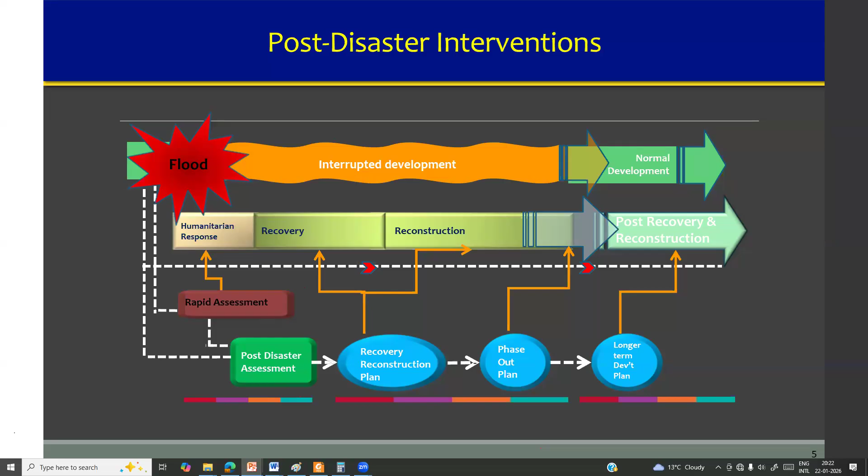So it is a collective response. It's not that a single government will come and take the response. It is a collective response. Even a small support to the government, or a small support of government, it's like a mutual thing. So we have to be responsible in every aspect.

So basically, PDNA will focus on all aspects. What is the loss in agriculture, financial loss, industrial loss, tourism loss, housing, education, health, culture, water, community, energy, transport, everything will be counted. Immediate relief will be provided, and for future schemes, how can we go forward?

One more issue we are facing nowadays is like the highways. If you look at the highways, both left and right sides are literally low, and water will not travel from this side to that side. We don't have proper drainage systems, so that is also getting affected.

So all these things will be covered by our post-disaster need assessment team. They will thoroughly examine every aspect. They will go to the place, they will talk to the people, they will count the losses, economic losses, and what are the recovery needs you want.

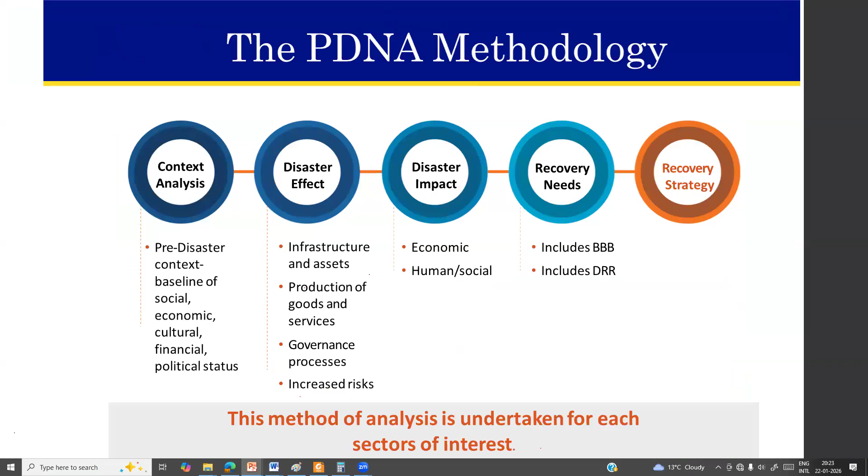So this BBB is nothing but build back better. Build back better. So what is build back better? First we will provide these recovery strategies and financial resources. Whatever financial resources we can avail from the government can be provided, plus you have to invest so that it can be a cumulative outcome.

So first we have to talk about damage. As in building damage, my car is damaged - this comes under the category of damage. Loss: I have a financial loss because I'm not able to go to job, I'm not able to do my business, so I'm not able to transport all my goods to some other places. These are the losses regarding the financial.

And another loss is, because of overflooding and flooding into my houses, I lost my properties, I lost my materials, I lost my assets, everything. And its effect is like if I don't have a salary for a month, what will be my effect? That is the post effects. And its impact - obviously we will have a lot of impacts because I don't have money, and because of sanitation, I'm going to have medical issues.

So it is like a continuous process, and we will have a lot of needs. So if you go there, people will surround you and they will ask, I need this, I need this, and how can we provide? How can we provide? That is our task. We have to do all the support to the people, and figure out in which way we are going to do it - that is the needs actually.

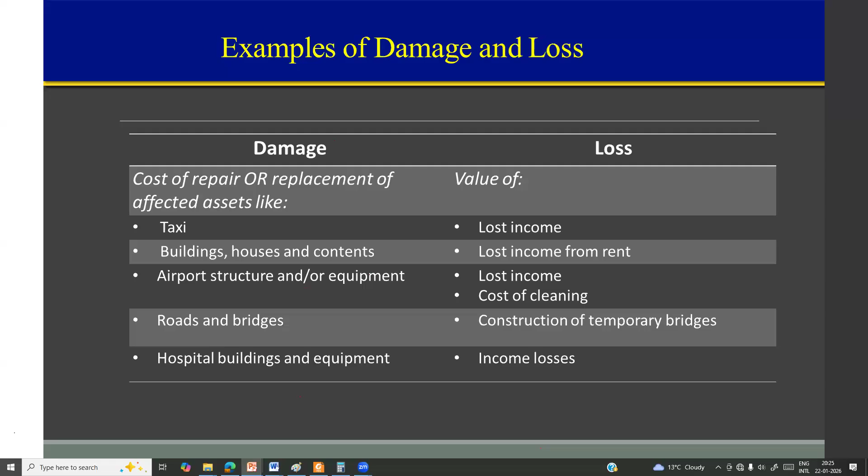So let me skip all these things. Just imagine a typical example: a taxi guy will lose his income because taxi movement is stopped. Building owners lose income from rent because the building is submerged. Airport structure loses income because the airport is not operating. Roads and bridges - construction of temporary bridges needs a lot of money, that is a loss. Hospital building and equipment is lost, that is a loss.

So damage is asset based, and loss is based on our financial losses, material losses etc. will be covered. People should know the difference between these two.

So priority of recovery: short-term needs for immediately. What should I do? What should I do? I have to relocate the people, I have to make temporary bridges, I have to provide proper drinking water, I have to accommodate people with proper shelters, and I have to provide a minimal amount for their immediate support, medical teams.

And medium term is we have to immediately reconstruct their houses, repair works to be done, and we have to move the people, clean the area. And long term needs is, further in future, this kind of problem should not come. For that purpose we have to improve our infrastructure. How can we improve that? That is the long-term needs.

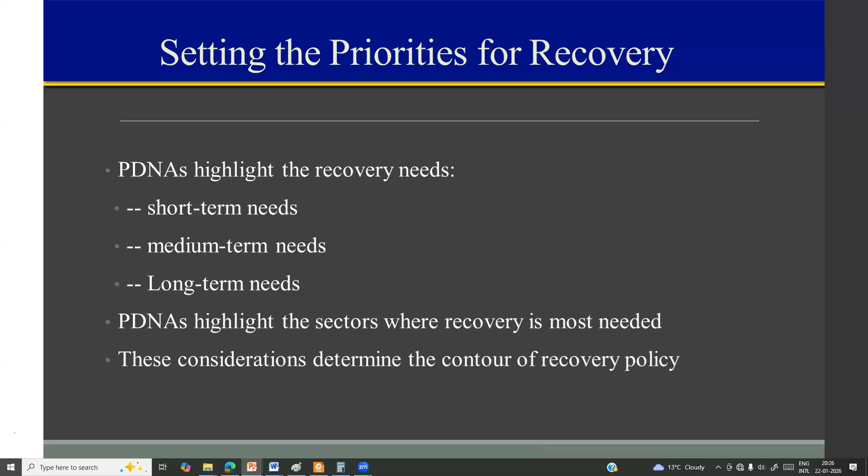Reconstruction, resumption, restoration, and risk reduction - reconstruction of infrastructure and physical assets. It's not a simple thing. Reconstruction of bridges - so what is the need for reconstruction of bridges?

If you think about old bridges, they are still surviving, but in future they may not survive. So we have to reconstruct with new bridges of advanced technology so that I can completely avoid erosion of piers and subsequent failures, and then avoid further damage.

I can at least control disconnection of transport facilities and drainage systems. I have to reconstruct based on the volume of water, because earlier we had 10 lakh people, now we have 15 lakh people in a particular city. So water discharge increases, area is same but people increased, so volume needed is very high, while drainage systems remain at the same level. So that has to be reconstructed so I can easily drain the water if rain occurs.

Very importantly, railway networks - now we have metros. If you look at metros, many are on bridges, and a few travel through underground tunnels. If your railway systems are elevated, then once the rain is over, I can easily resume transport.

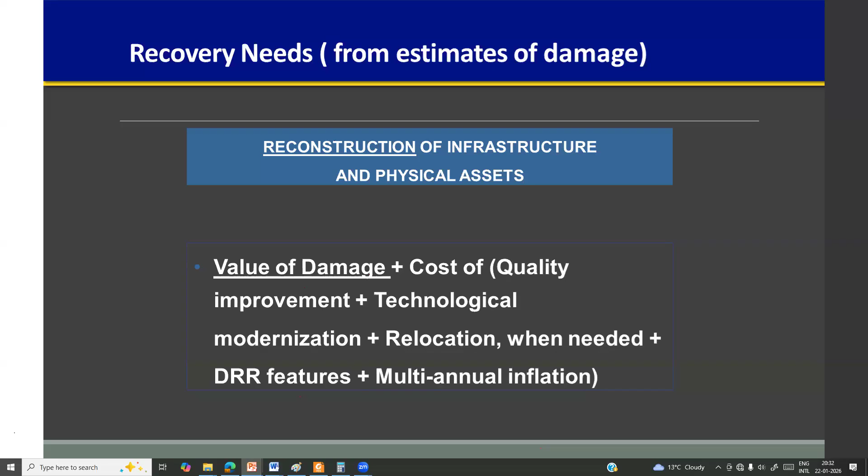Then people start to protest, saying we are facing a lot of pollution because of this industry, kindly vacate the industry - but that is actually an industrial area, we should not go into it. Still, people go there, establish colonies, and protest against the same industrial area. This should not happen. Where you should not construct, you should not construct. First, know about your area and then do the construction.

If you have a build back better concept, you have to do a proper construction with the proper mitigating measures, so that I can avoid all this kind of stuff. So I have to relocate myself to another area. Government will provide you the land. You may ask me, sir, government will not provide you. Yeah, we have seen government is providing. If you have losses during this flooding time in an area, if the land belongs to you, they will give you some other locations in some other area. Of course, you will feel displaced, but there is no option.

We got to go away from those regions, so that I can avoid myself in future course of action. So when you go for disaster risk reduction, I want to reduce my risk during any kind of floods or any kind of thing. So I want to elevate my floor level to a higher height.

Now what is happening? We are constructing a road, over that another road, over that another road. Basically, it should not be. We have to remove the boulders and reconstruct so that the road level remains same, but we are not doing that. Are we taking any action against this increasing road level? No. Because of that, our buildings are going down. In a 25, 30 year old building, you can see the road levels went up and buildings went down.

So basically, road level should not go up. But we are constructing road over another, over another, over another. And because of that the road level is going up. So now when you talk about build back better, you have to increase the height of the building by at least 1 meter, so that in the next 30 to 40 years, when my road level comes up to that area, it will be fine. So everything we have to consider.

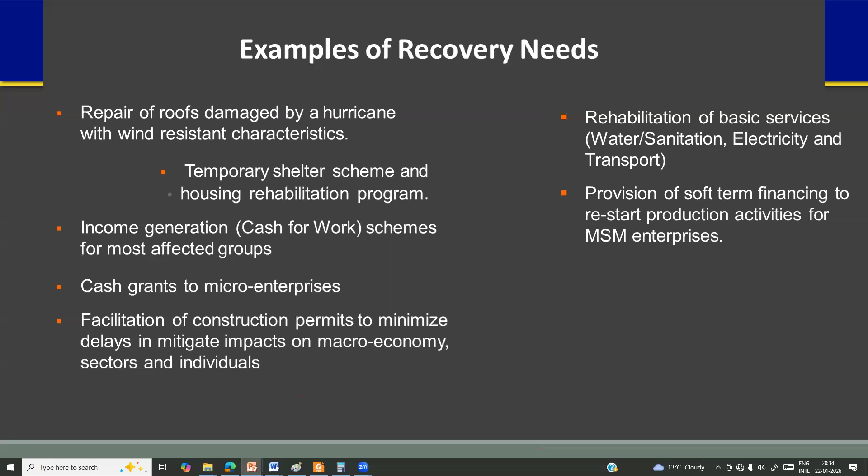So relocation is a must. The people below the poverty line are struggling to make use of government schemes for construction of houses due to inadequate initial funds up to foundation level. So they have limitations. Government should come up with alternative methods so that the foundation will be provided by some other agencies, funded by government. And flood resistant structures, so that if my building is in a low lying area, I need a protecting wall so that I can avoid these kinds of problems.

So houses affected due to inundation need to be considered for relief in addition to the damage relief fund. So when you do post disaster need assessment, we will know what are the needs of the people, so that we can easily come up with some good solution to completely support them in terms of reconstruction and improving their habitat.

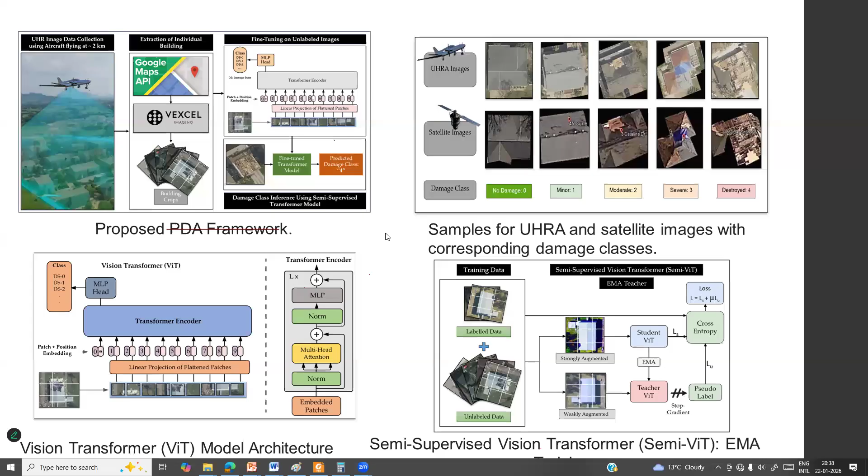Finally, community preparedness, infrastructure assessment, temporary diversions, traffic restoration, early warning improvements, debris clearance - everything we have to focus on, so that we can mitigate ourselves from disasters, and even if one occurs, we can bounce back immediately and address any kind of issues.

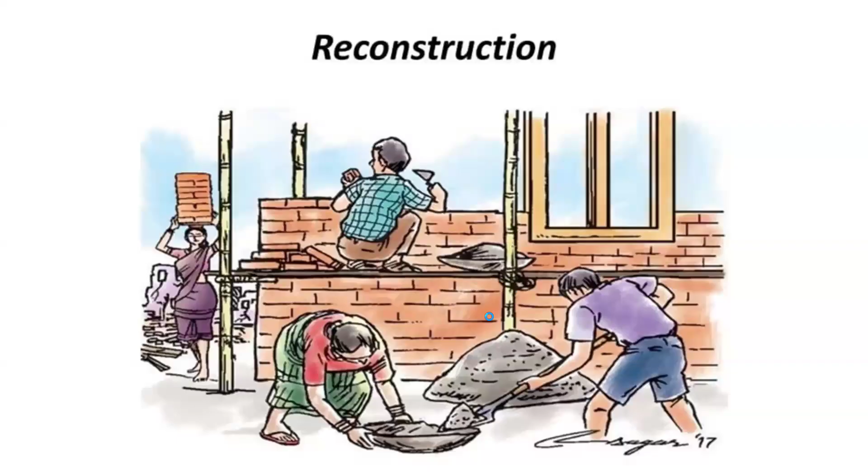Quickly, I will go through this reconstruction process. First is restore. We have already covered many prerequisites, like assessing damage, collaborating with stakeholders, resource mobilization, emergency response planning and design, and infrastructure reconstruction. For damage assessment, we use tools like rapid visual screening, among others, to determine whether a structure is repairable or needs to be demolished and reconstructed.

Now you have to collaborate with stakeholders, so that with the help of non-profit organizations, government will fund you. This collaboration allows for better construction and resource mobilization, like securing funding. Now we are getting loans with supportive reduced interest rates. So in the future, when you go for proper planning, you consider seismic resilience.

When you consider seismic resilience, wind is also considered, flood is also considered. But tsunamis are not considered, because for tsunami it is a different type of procedure we have to follow. So according to the need, it has to be considered.

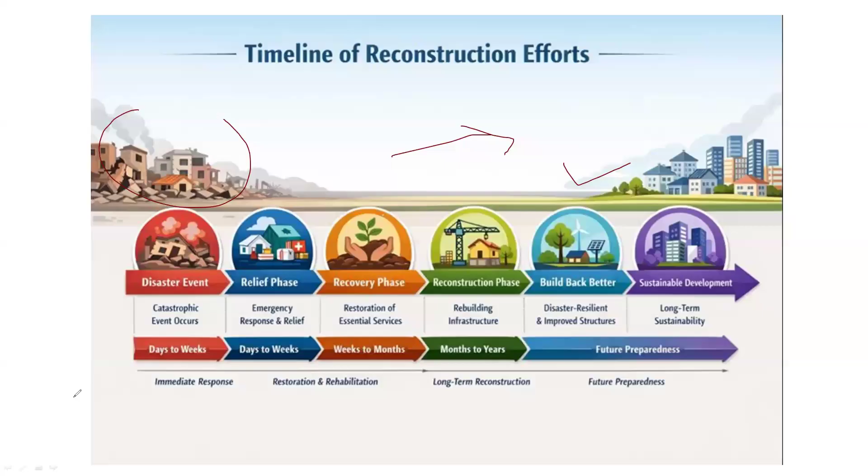So on the timeline, when the disaster event happens, we go to the immediate relief phase first, then the recovery phase, where we allow time to recover, then the reconstruction phase. In reconstruction, we follow the concept of build back better, which is the concept of PDNA, so I can make a sustainable society, prepare people for the future, and become stronger so nothing happens to my buildings or I don't have much loss. We have to travel from this point towards that point - this is the main task of post disaster need assessment.

So what is build back better? As mentioned in many slides, when you're affected by a disaster and coming back from its impact, if you're in a low-lying area, you elevate your structures. If your bridges are very old, you reconstruct with new bridges. If your roads are eroded due to rainwater erosion, you go for rigid pavement instead of flexible pavement. If your electricity is getting affected, you go underground. If your drainage system is inadequate, you build much bigger drainage systems. We have to follow a proper methodology so that nothing happens to me in the future - that is my ultimate aim, and that is the concept of build back better.

So what is the role of civil engineer in this case? In this case, everything is related to civil engineering, right? So damage assessment I got to do, design of disaster resilient infrastructure - these are civil engineer roles.

Retrofitting and strengthening of existing buildings using durable and cost-effective solutions, and quality control, because now in India most structures are getting affected due to one major thing called quality control. We have studied about this in books, but we are not following it in practice. Because of this, we are losing a lot of funding, resources, materials, money - everything is getting lost. You would have heard about buildings getting corroded, buildings piling, this kind of thing. So those things happen because of poor quality control. Those things should not happen.

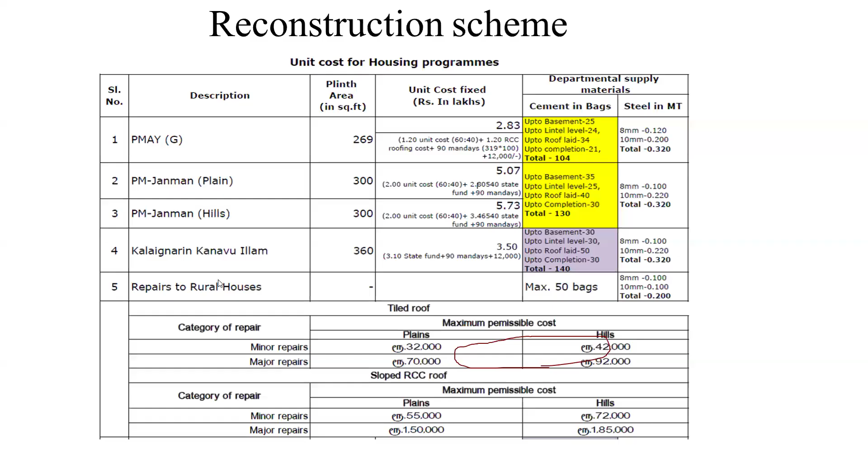So government has a lot of schemes. These are example schemes I'm showing you. It's available online, you can take it from anywhere. With the help of this, additional amounts can be arranged and we can make good buildings. I'm not going to go into much detail here since these are all funding schemes.